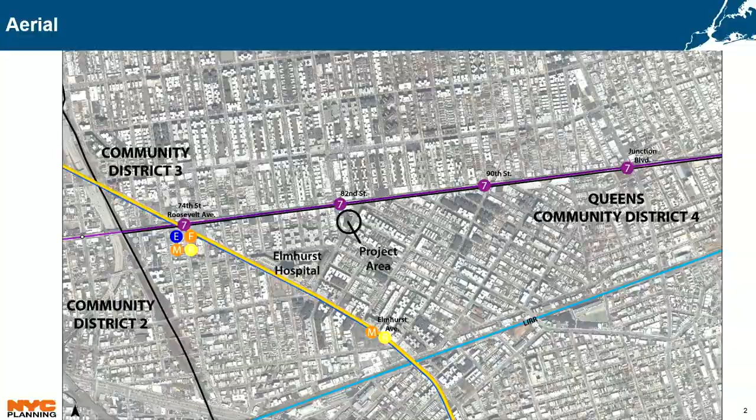The project area consists of a portion of a block of block 1493, lot 15. It is an irregularly shaped corner lot located in an R6 zoning district with a C1-3 commercial overlay, which is mapped at the time of the zoning resolution in 1961. The dotted outline here indicates the proposed rezoning district boundaries covering a portion of lot 15.

The applicant proposes to rezone the project area to a C4-5X district, which is an R7X equivalent.

The Elmhurst portion of the surrounding area borders the Jackson Heights neighborhood, loosely separated by Roosevelt Avenue to the north of the project area. And the area has a vibrant mix of commercial and residential uses, with commercial overlay districts lining major commercial corridors, concentrating local retail and offices along Roosevelt Avenue and 82nd Street.

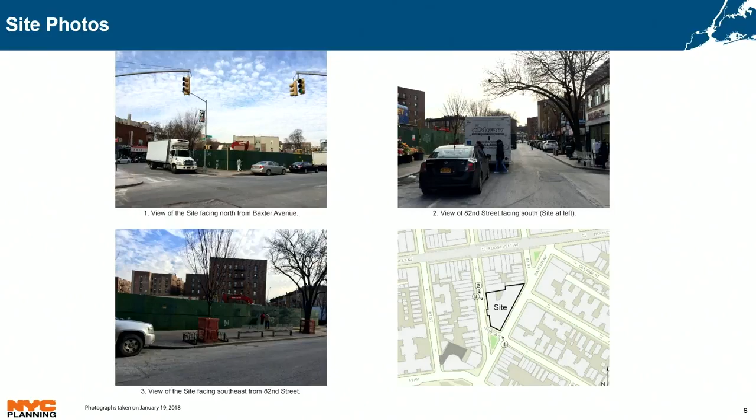So these site photos show all 3 street frontages where primary pedestrian entrances would be located or accessed from along 82nd Street and Baxter Avenue. In this first photo, we're looking at the frontage on Ithaca Street and Baxter Avenue, and the preceding photos show the corridor along 82nd Street. We're also showing views from Baxter Avenue, which would also have pedestrian access as well as a parking entrance.

So the applicant proposes 2 actions. First is a rezoning of the portion of the block on 1493, lot 15, from an existing R6 district with a C1-3 commercial overlay to a C4-5X district, again which is an R7X residential equivalent. The C4-5X district line would be mapped 180 feet south of and parallel to Roosevelt Avenue.

There is also an R7X district located just 6 blocks west of the project area, which was established in 2007, located also right by the Roosevelt Avenue subway station and transit hub, and it is an equivalent district that anchors higher density in a transit-oriented nature on a block entrance of a subway line.

In conjunction with this rezoning, the applicant proposed to establish within this proposed C4-5X district a mandatory inclusionary housing district with options 1 and 2. The MIH district would be coterminous with the rezoning boundary.

With option 1, 25% of residential floor area would be made affordable for residents with incomes averaging 60% AMI, with a minimum of 10% of housing to be affordable at 40% AMI, as well as option 2, where 30% of the residential floor area would be made affordable for residents with incomes averaging 80% AMI. The AMI for CD4 is roughly $47,404.

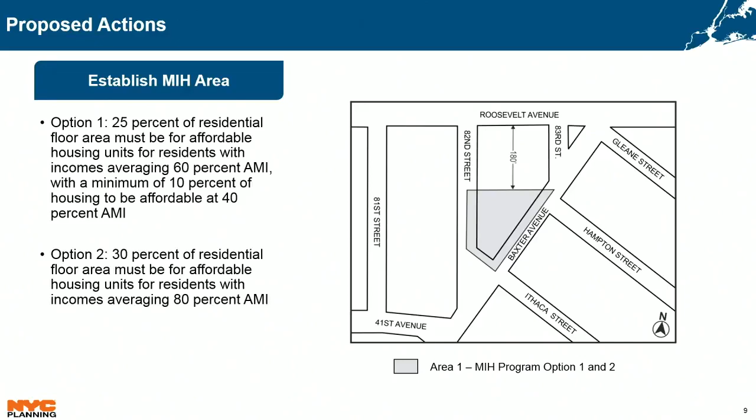So moving on, the proposed rezoning and establishment of the MIH area would facilitate the development of a new 13-story building covering the entirety of lot 15, with primary frontages along 82nd Street and Baxter Avenue.

The new building would consist of approximately 120 units, including 30 to 36 affordable units under the proposed MIH options. Roughly 2,000 square feet would also be dedicated to community facility use, as well as roughly 40,000 square feet of commercial uses. And there would be approximately 128 parking spaces located in the subcellar.

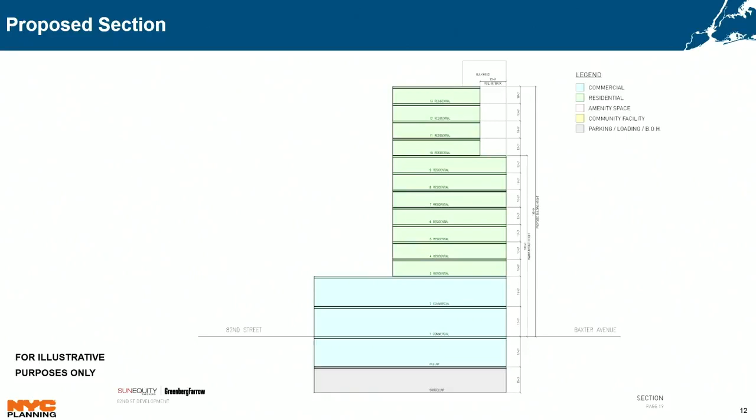Looking north, the first 2 floors of community facility and commercial are proposed to rise 2 stories and then provide a setback along Ithaca Street and 82nd Street before rising to a maximum base height of 105 feet at the 9th floor. The building is set back 15 feet at the 9th floor along Baxter Avenue before rising to a maximum building height of 145 feet at the 13th floor.

Questions from the commission? Commissioner de la Uz.

How are you? Good, how are you?

Good. So can you maybe describe a little bit what kind of outreach the developer did with the community to get to this proposal? Sure. Considering it's a pretty significant change.

Yes, the applicant has been meeting with the Community Board 4, as well as the BID and the local incoming council member, Moya, regularly. And the MIH options have been developed through guidance from the local council member.

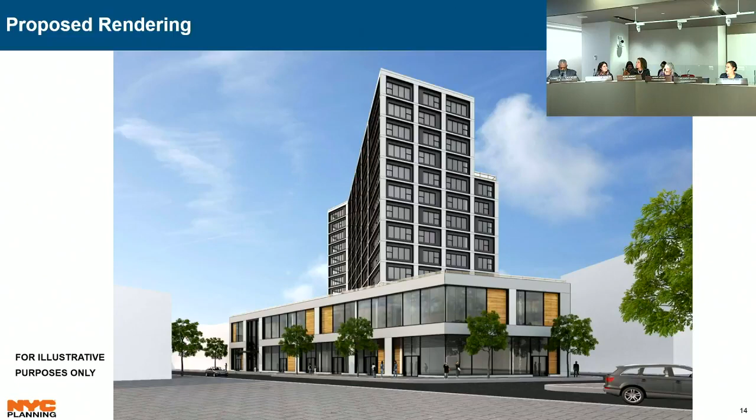One thing to note on the site plan, I don't know if we can go back to that. Yeah, actually, no, well, further, yeah, okay.

I am aware of conversations that have occurred that looked at the potential closing of Ithaca Street between 82nd and Baxter, which is really an underutilized connection. I know in other neighborhoods they have found ways to reclaim some space like that, and this is certainly a neighborhood that is in great need of space, and the kinds of tenants at this location will draw quite a number of people. So that could be an opportunity to consider as we look at this as well.

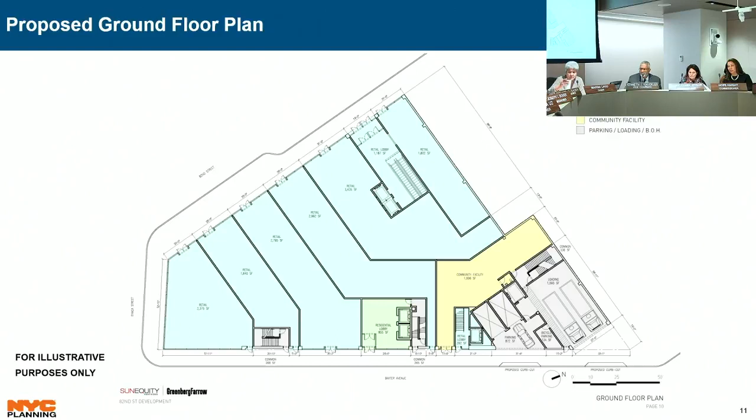Other questions? Yes, Commissioner de la Uz. That kind of triggered something for me, especially given where the loading dock is in relation to where the retail spaces are. What's the internal connection? Because right now it doesn't seem like it would be very helpful to those retail spaces.

I can get you some information on how circulation would happen in the subcellar in order to see where loading docks are located.

Other questions? Okay, the application is certified. Thank you.

The second item on the agenda, page 18, is a certification for special permits in Manhattan Community District 6. Nabila Malik of the Manhattan office is here to present.

Good afternoon, Commissioners. This is a private application by the Kips Bay Towers Condominium, Inc. for special permits pursuant to Section 13-45 for 2 separate at-grade parking lots servicing the North Tower and the South Tower of the Kips Bay Towers Condominium in Manhattan Community District 6.

Specifically, the applicant seeks 2 special permits: one to add 10 and legalize 8 existing parking spaces at the North Tower lot, and to add 4 and legalize 15 existing spaces at the South Tower lot. So 23 of the 37 total spaces to be added have existed and been in use by the building's residents for nearly 15 years as a result of the lots being restriped by the site's prior management to accommodate additional spaces, but without obtaining proper agency approval.

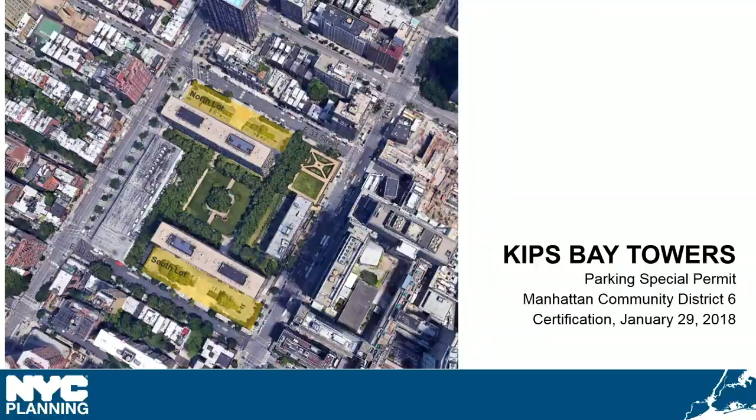The condominium site is shown in red. It's bounded by 1st and 2nd Avenues and East 30th and 33rd Streets, located in Kips Bay in an R8 zoning district with a C2-5 commercial overlay portion to the north of the site.

For some additional context, there is a rezoning application across the site on the north side of East 33rd Street that was certified 2 weeks ago.

The site, designed by I.M. Pei in 1961, is approximately 330,000 square feet and contains two 21-story residential towers, a north tower and a south tower, with a total of about 1,100 residential units.

The site is serviced by 3 parking facilities: one at-grade parking lot at the north tower with a legal capacity of 50 assigned parking spaces, one at-grade lot at the south tower with a legal capacity of 50 spaces, and a central below-grade parking garage with 300 spaces total for transient and residential accessory parking. The garage is operated by a third-party operator unrelated to the condominium.

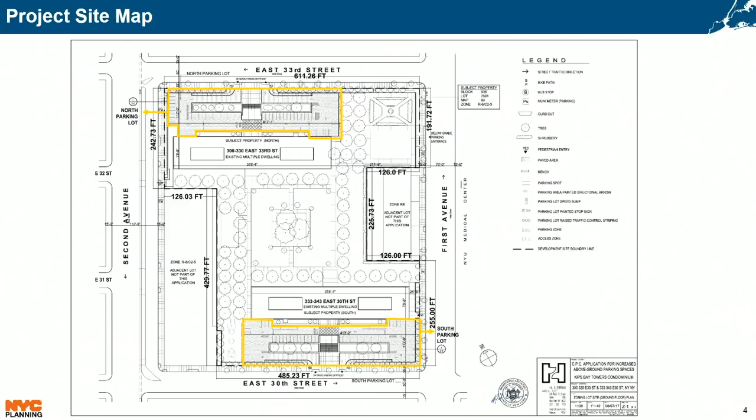The north lot, about 27,000 square feet, is located between the north tower and East 33rd Street. East 33rd is 80 feet wide westbound and has 3 travel lanes and 2 lanes for on-street parking. The lot is serviced by 2 one-way curb cuts, with the entering curb cut located to the east.

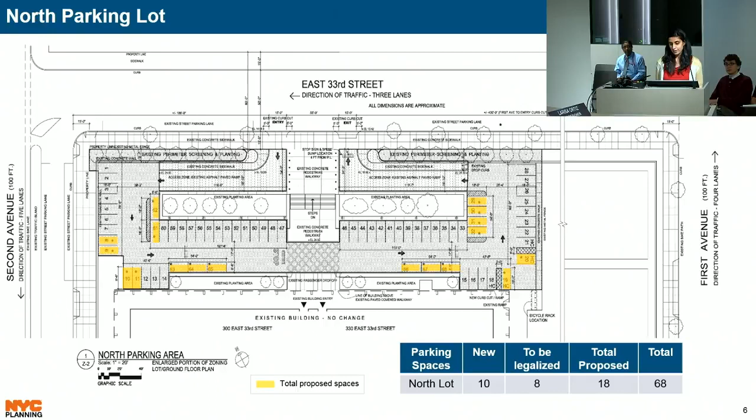The applicant proposes to increase the number of spaces by 18 from the permitted 50, for a total of 68 spaces, with 8 of the 18 spaces to be legalized in this application. 4 spaces would be designated as ADA accessible and would be located adjacent to curb cuts leading to the North Tower's front entrance.

The south lot, also about 27,000 square feet, is located between the south tower and East 30th Street. East 30th is 80 feet wide eastbound and has 3 travel lanes, a bike lane, and 2 lanes for on-street parking. The lot is serviced by 2 one-way curb cuts, with the entering curb cut located to the west.

The applicant proposes to increase the number of parking spaces by 19 from the permitted 50, for a total of 69 spaces, with 15 of the 19 spaces to be legalized in this application. Like the north lot, 4 spaces would be designated as ADA accessible.

The parking spaces are not rented to or used by the public. There will be no change to the existing curb cuts, and the current configuration of the lots can accommodate additional spaces without increasing the size of the asphalt surface. The project will also include additional striping for pedestrian crosswalks, bike racks, and 2 speed bumps in each lot.

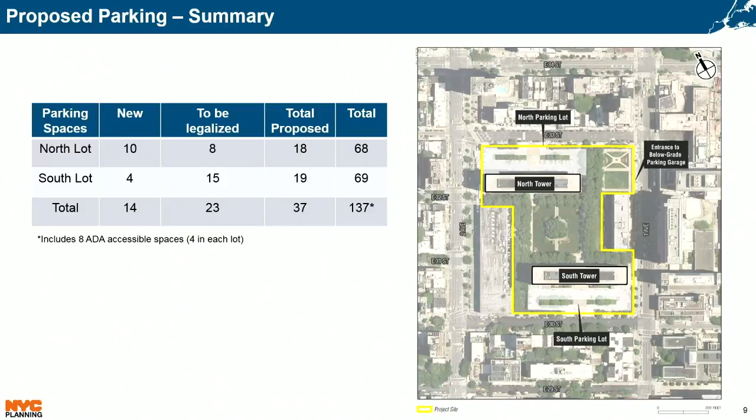In order to address the findings of Section 13455 for existing parking facilities, the applicant undertook a parking study and examined the change in residential units and parking spaces during the study period, which was a period of 10 years, in order to determine whether or not the proposed addition of 37 spaces is reasonable and not excessive in relation to recent trends in the area.

20% is the maximum permitted as-of-right ratio for Community District 6. So the applicant is seeking special permits pursuant to Section 13-45 for the north and south parking lots at Kips Bay Towers.

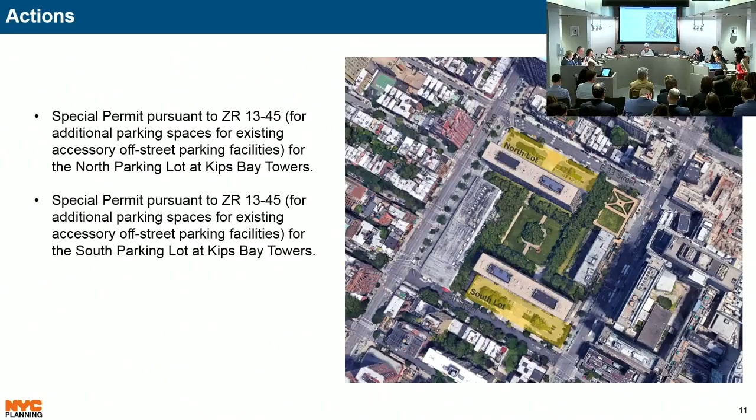The third item on the agenda, page 94, is a certification for zoning map and zoning text amendments and a special permit in Manhattan Community District 3. Xinyu Liang of the Manhattan office is here to present.

Good afternoon, Commissioners. This is an application by 14th at Irving LLC and New York City Economic Development Corporation, EDC, for approval of a zoning map amendment, zoning text amendment, and a special permit to facilitate the redevelopment of a 21-story mixed-use commercial development on a city-owned site located south of East 14th Street between 3rd and 4th Avenue in the Union Square neighborhood of Manhattan Community District 3.

According to EDC, the proposed actions are necessary to accomplish the project's goals, which include creating a 21st century technology hub that provides job training, startup office space, traditional office spaces, as well as an engaging ground floor retail use that will enhance the pedestrian experience of the neighborhood. The proposed project is anticipated to be completed by the end of 2020.

To provide some background, the unrestricted disposition of the entire project area was approved by the City Planning Commission in 1983 with no end user specified. The project area is comprised of 2 tax lots.

Lot 55 on the East 13th Street frontage was sold to Help USA, a nonprofit organization, to construct supportive housing called Genesis Building. In 1993, the PC Richards building was constructed on Lot 16 along East 14th Street frontage.

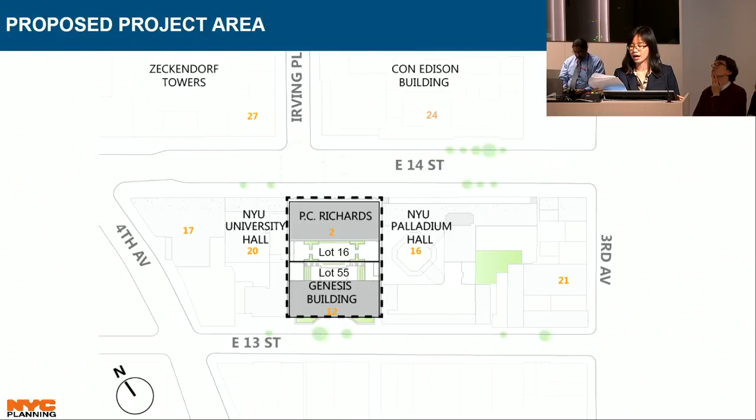Lot 55 along East 13th Street is improved with the Genesis building, built in 1994. It is a 12-story brick building providing 94 units of supportive housing and services.

The development site, Lot 16, along East 14th Street is improved with the two-story PC Richards building built in 1993. The distance between the two existing buildings is about 64 feet 6 inches, which is currently used as the rear yard for the Genesis building.

One thing to mention is that the applicants propose to redevelop only the PC Richard building site. There will be no change to the housing and supportive services in the Genesis building.

The proposed development will be approximately 209,000 zoning square feet of commercial development and will have a FAR of 6.8 over the entire zoning lot. The existing Genesis building has a FAR of about 3.2. In total, the FAR for the proposed development and the existing Genesis building will be 10 over the entire zoning lot.

The development site will be subject to a disposition agreement for a 99-year ground lease. The lease will restrict the property to some specific programs in each type of space.

The retail use on the base will include a food hall with restrictions on booths to encourage smaller and entrepreneurial retailers and bring the community and residents into the building.

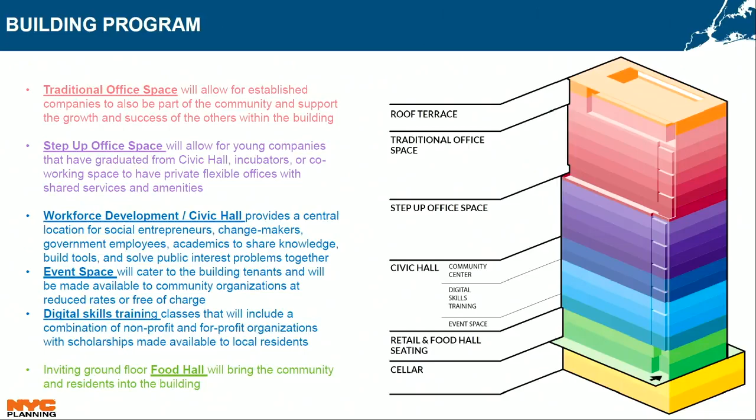According to EDC, the proposed zoning map amendment to extend the C6-4 district to cover the entire project area is consistent with the surrounding zoning districts, uses, and built form. Additionally, the area is well served by mass transit, and East 14th Street is a 100-foot-wide street that provides vehicle and pedestrian access across Manhattan.

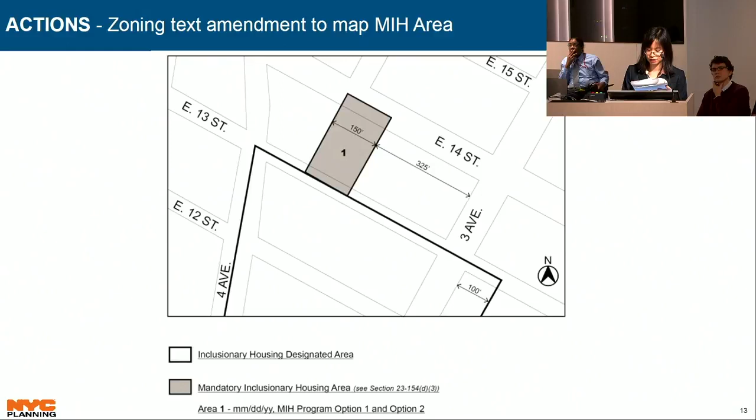Secondly, the application seeks to amend Appendix F of the zoning resolution to establish an MIH area over the project area. Please note that the proposed development does not contemplate residential uses. However, because there is a substantial increase in permitted residential capacity due to the proposed rezoning, the MIH program applies here.

Thirdly, the application is requesting a zoning text amendment that modifies zoning resolution 74-721 so that the project area is eligible for the bulk waivers. Specifically, the zoning resolution will be updated so that zoning lots less than 40,000 square feet but over 30,000 square feet and fronting a wide street in a C6-4 district in Manhattan Community District 3 can benefit from the bulk waivers.

Lastly, the application is seeking the 74-721 special permit to allow two bulk waivers to modify both the height and setback requirements and the required rear yard equivalents.

The proposed development has a straight wall that rises to the 13th floor before it sets back 10 feet, then rises again to the 19th floor, setting back 6 feet, then rising to its maximum height of 286 feet.

The second waiver being requested is relief from the 60-foot rear yard equivalent requirement. The application is requesting a waiver of 8 feet to allow a 52-foot deep open area.

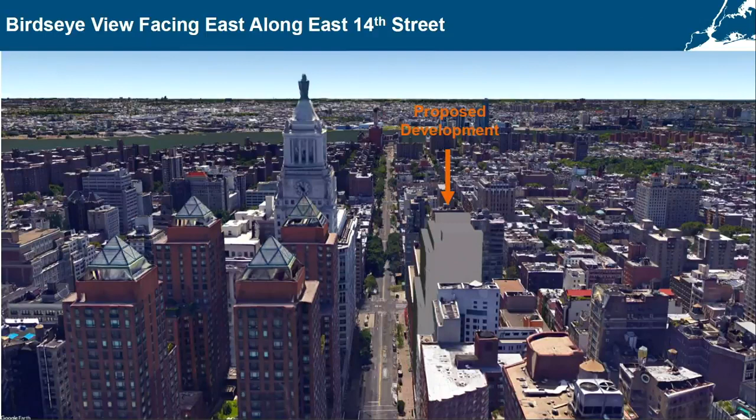Questions from the commission? Commissioner Deloze. Hi. A couple questions.

One is, given that this is a 99-year lease and that there's obviously public benefit intended for this project, what's the ongoing mechanism for the community to give input into this project over the course of the lease? Has that been determined, do we know?

I will have to get back to you on these questions.

Okay. And then it would just be helpful to have, when it comes back, more information about the nature of the programming. I love the color codes, that's great. But the nature of the programming and the resources to support it. Is it the market rate components of the project that are subsidizing the more public benefit pieces like that? That would be helpful to understand, especially, and who the intended beneficiaries of that are. Especially given the fact that it's between two NYU facilities. There may be a mismatch between who the beneficiaries are intended to be versus who's immediately located next to the property. Okay.

Thanks. Other questions? Commissioner Levin.

I had those questions as well, and I'm curious to know, in addition, once we get an understanding of what the immediate vision for the building is, also how the lease agreement or other documents surrounding this will enforce that into the future, because we all know that real estate takes twists and turns and unexpected things happen. And so we want to be sure that the public purposes that are reflected in this project get realized in an appropriate way.

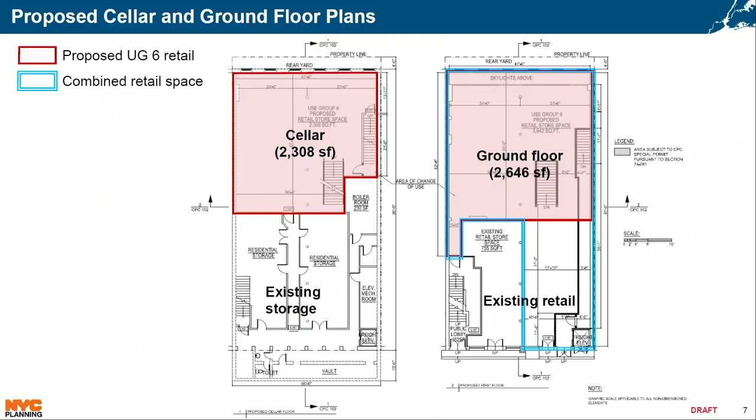To facilitate the proposed retail use, the applicant requests a special permit under Section 74-781 of the zoning resolution, where certain findings regarding good faith marketing efforts need to be made. Since June 2013, the applicant advertised the availability of the cellar and ground floor space of the building for as-of-right uses, most recently at a rate of $70 per square foot for a period of over a year. The applicant's marketing efforts include advertisements in citywide and local newspapers, marketing through brokers, and outreach to industry groups. According to the applicant, despite these efforts, there had been no demand for long-term use of the vacant space for as-of-right uses as of the date of the filing of this application. The applicant's statement of findings and sample marketing materials are included in your briefing packages.

That's it for the presentation. Happy to answer any questions. Questions? Commissioner Levin.

Sylvia, do we know what happened to the tenant in the ground floor residential space and whether they were in occupancy when the applicant purchased the unit? The applicant stated that by the time they acquired the unit in 2013, it had already been vacated. But we can ask the applicant to look into the historic tenancy.

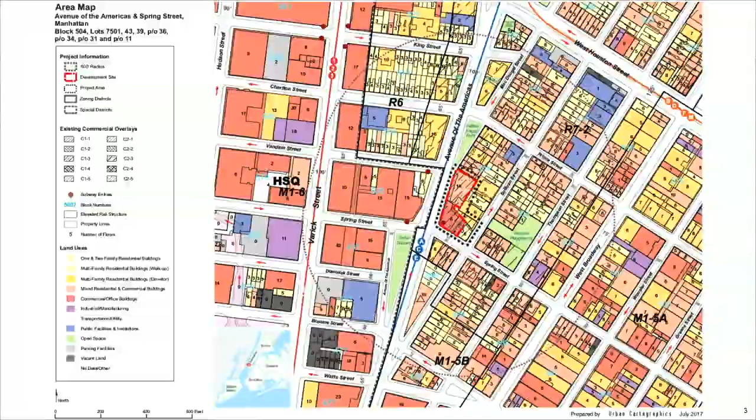As shown on the zoning comparison table, the regulations of the 2 commercial overlays are largely identical, except that the C2-5 overlay permits a wider range of commercial uses.

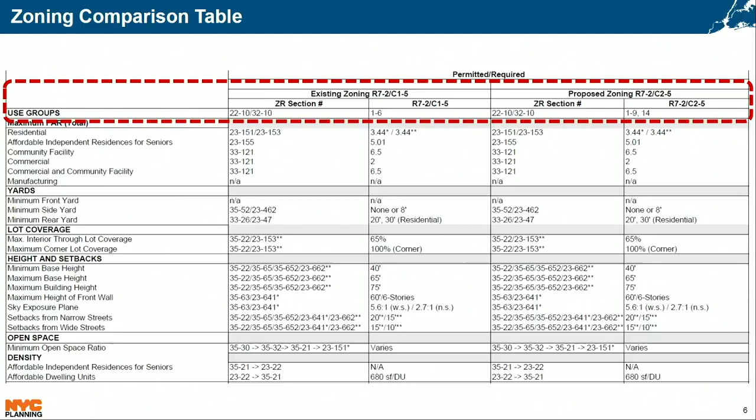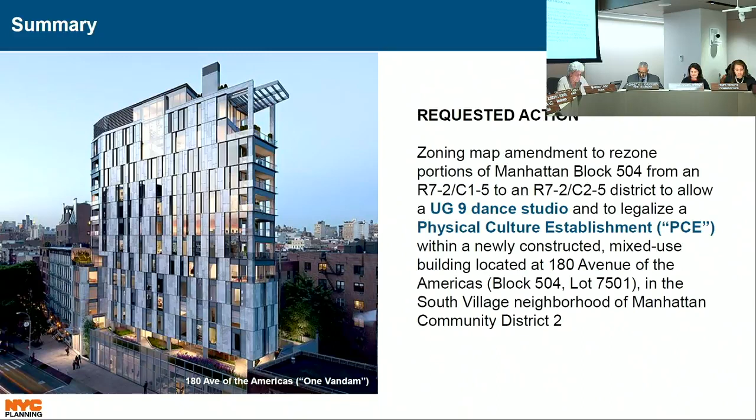Okay, the application is certified. Thank you.

The 6th item on the agenda, page 190, is a referral of a zoning text amendment in Manhattan Community District 4. Annie White of the Manhattan office is here to present.

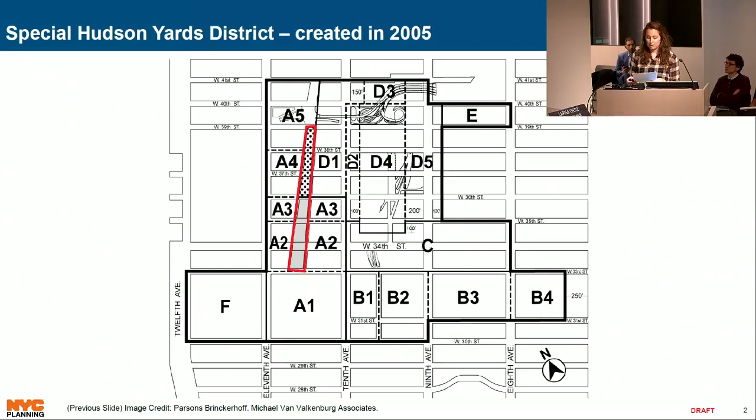For some background, the Special Hudson Yards District was adopted in 2005 with the intention of creating a mixed-use, medium to high-density business district with an extensive open space network. The primary open space is the Hudson Boulevard and Park, which I've outlined in the zoning map here in red. It's a linear north-south park that will be bordered by a tree-lined boulevard that, upon completion, runs from West 33rd Street to West 39th Street, mid-block between 10th and 11th Avenues.

Phase 1 of the park, which runs from 33rd Street to 36th Street and includes what we refer to as blocks 1 through 3, was acquired by the city for redevelopment and opened to the public in 2015. Phase 2, which I've indicated here in the red outline, runs from West 36th to West 39th and includes blocks 4 through 6. It is not yet under construction, and lots in phase 2 are in private ownership and are subject to the special regulations that are the subject of this text amendment. Those regulations were included to facilitate these blocks' improvement as the boulevard and park, and also to allow owners to recognize the value of their lots that are now mapped as the park.

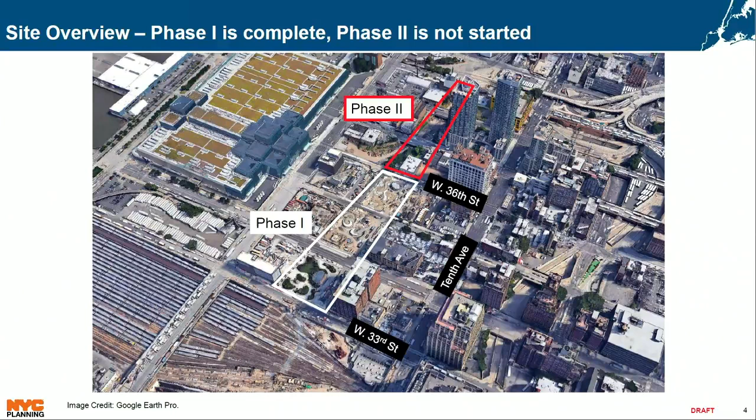Currently, Section 93-32 outlines floor area mechanisms for phase 2 of the park. First, there could be no new development or expansions in the mapped Boulevard and Park. There are operating businesses currently mapped as the park, and those can continue operating, but they're kind of frozen by the zoning.

Owners of property are able to transfer the development rights from the mapped park parcels to specific receiving sites throughout the Special Hudson Yards District, and we've seen multiple people come in for that chair certification for the transfer of development rights. Third, owners may seek a contribution in kind authorization, allowing property owners to build out portions or entire blocks of the boulevard and park in exchange for District Improvement Fund bonus development rights.

In July of 2017, the City Planning Commission approved the first of these contribution in kind authorizations for Tishman Speyer's property on Block 4. The department is pleased that this contribution in kind authorization mechanism is being used, as we want to see the expedited development of phase 2 of the Hudson Boulevard and Park.

However, City Planning has been approached by multiple parties, including City Hall, Hudson Yards Development Corporation, and private developers, who have brought to our attention that there are certain limitations in the text that discourage private applicants from seeking this contribution in kind. So I will run through the issues with the text as we've identified them, and then how we're proposing in the new text to address those, one by one.

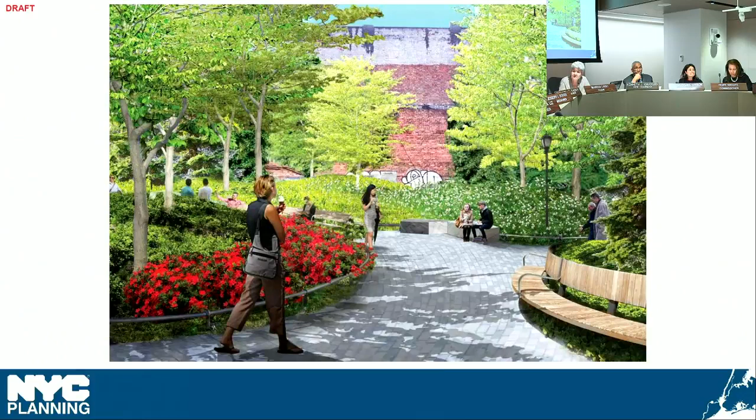Questions? Yes, Commissioner. Thanks for walking us through. I'm just wondering, I can't remember when this came before us earlier for the other property, whether the reasonable cost was determined using an independent party. Yes, there were two independent parties doing the analysis of the cost, and those were compared, and then that was provided as part of the authorization.

Okay. Would it make sense to make that clear? Perhaps, I'm not sure if that's something we discussed, but I'll go back to the group and bring that up. Thanks.

Other questions? Commissioner Levin. Well, just for information, you mentioned you've been approached by a number of folks interested in seeing this happen. Are you seeing interest in all three of the undeveloped blocks? Are people talking about parks on all of block 4, 5, and 6? Might it really happen? Yes, we're hoping. So there's certainly ongoing active conversations on Block 4 that we're hoping, if this text is approved, we'll see them quickly coming in for the authorization.

And then there has been conversations on Block 6, but those have kind of been put on pause. But we're hoping, HYDC's made it clear that after this text, if it's approved, they would want to reopen those conversations. Block 5, the eastern portion is already built out, and the lots on the western portion of the Boulevard and Park are still under kind of disparate private ownership. So those conversations aren't actively happening now, but perhaps down the road if there's some zoning lot consolidation there.

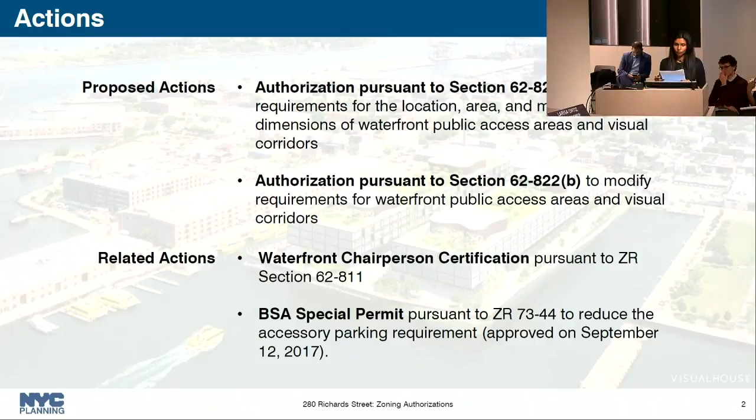Good afternoon, Commissioners. This is an application requesting zoning authorizations to modify waterfront public access area requirements. If approved, these actions would facilitate the development of an approximately 638,000 square foot commercial building and a 1.83 acre waterfront public access area. Related actions include a waterfront chairperson certification and a special permit from the Board of Standards and Appeals to reduce the accessory parking requirement.

The project site is located along the waterfront in the Red Hook neighborhood of Community District 6 in Brooklyn. The project area is located in an M3-1 zoning district, which allows for a maximum FAR of 2.0 and permits industrial and commercial uses in addition to limited retail uses. The surrounding area is characterized by a mix of commercial and industrial buildings, 2 to 3 story mixed use and residential buildings, vacant lots used for vehicular storage, and community facilities.

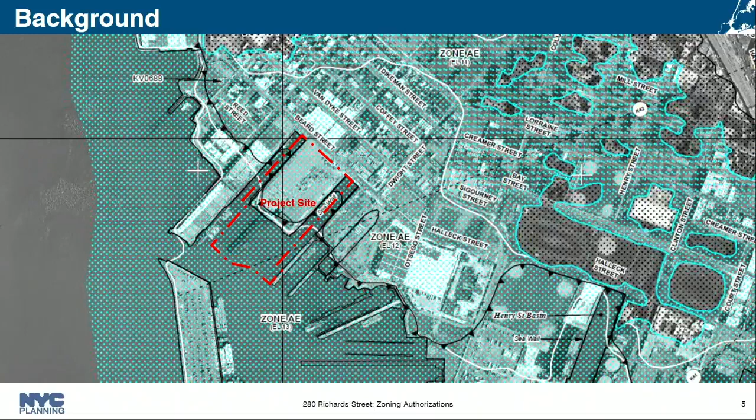The Southwest Brooklyn IBZ runs along most of the waterfront in Red Hook, but does not include the project area. The project site is located within the 100-year flood zone with a base flood elevation of 13 feet. The project site is the location of the former Revere Sugar Factory, which ceased operations in 1985 and was demolished in 2007. The site is currently vacant.

The landward portion is a rectangular-shaped peninsular lot, bounded by Beard Street to the northeast and the Erie Basin to the east, south, and west. To the west of the project site are the Beard Street warehouses, which contain commercial and industrial uses. Further west is an MX district, which was the result of the 2002 Red Hook stores rezoning, which facilitated the establishment of a Fairway grocery store with residential units above in a 5-story warehouse building.

The Erie Basin breakwater to the south contains warehouse and storage facilities and a barge port that generates commercial marine traffic. To the southeast is an IKEA home furnishing store, which was the subject of several actions approved by the CPC in 2002 that permitted a large-scale retail establishment in an M1-1 district and waived certain waterfront area bulk and design regulations. The IKEA site includes a waterfront esplanade that extends along the site's entire waterfront that would connect to the proposed development's waterfront public access area.

Nearby access to public transportation includes bus service with the B61 and B57 bus routes, making stops a block away from the project area, and ferry access to Manhattan at the IKEA dock and the Red Hook dock at Bergen Street. The nearest subway station is the Smith and 9th Street station on the F and G lines, slightly over 1 mile from the project area.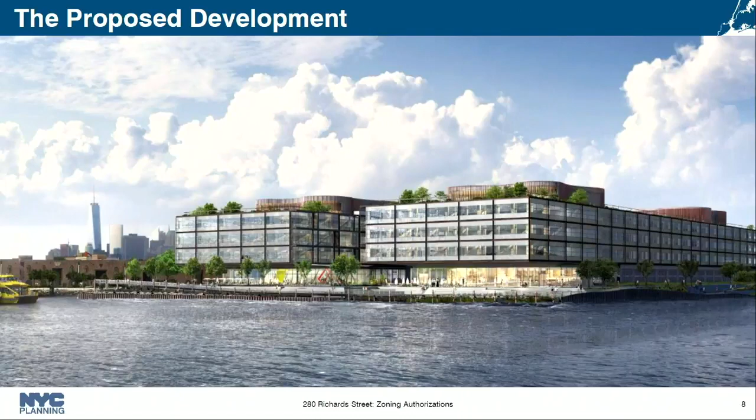The proposed building would be a 5-story building with approximately 614,000 square feet of office use and 24,000 square feet of retail use. The first story would include retail uses and office lobby space, while the 2nd through 5th stories would be occupied with office uses. The 2 parallel structures would be connected below grade by an accessory parking facility, which was the subject of a special permit from the BSA to reduce the accessory parking requirement for the proposed use group 6B office use.

Given the peninsular-like shape of the lot, which results in a long shoreline, approximately 1,900 feet, the applicant has designed 4 distinct areas of publicly accessible space: the eco-recreational edge, the basin panorama, the urban maritime edge, and the visual corridor. The following diagrams and renderings show the proposed design and edge conditions along these areas.

The eco-recreational edge is located along the southeastern border of the project area. This length has been designed to facilitate interaction with the water's edge in different ways. The primary circulation path is located closer to the building, with a secondary path that splits from the primary path and leads down to the water's edge. Between these 2 paths are landscaped areas and a variety of seating options, including timber seating and stone seat walls.

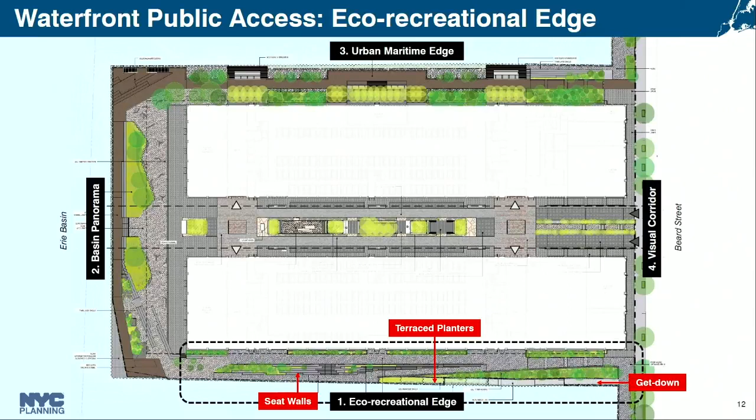The basin panorama is located along the southwest edge of the project area. From the end of the eco-recreational edge, the main pedestrian pathway would be a timber boardwalk, which continues along the edge of the waterfront, turning towards the northwest. Granite seat walls are located behind a sunken planter with ground cover, shrubs, and trees. The main pedestrian pathway connects to a stone staircase at the center of the basin panorama, which allows for circulation between the basin panorama and the visual corridor.

At the southeast corner of the site, the bulkhead would be cut back to allow water to flow beneath the main pedestrian path, which is an elevated boardwalk at this location.

Further west of the central stairs is a sloping lawn that would provide expansive views of the Erie Basin. Granite seat walls are located at the base of the lawn along the primary circulation path. At the southwest corner is a timber amphitheater that slopes up towards the waterfront, with seating facing in towards the basin panorama.

Continuing along the waterfront, the urban maritime edge is located along the northwestern edge of the project area. The design is inspired by the working waterfront across the inlet, which contains docks for the New York Water Taxi and other marine vessels along the Civil War-era Beard Street warehouses. This edge offers a series of views across the inlet.

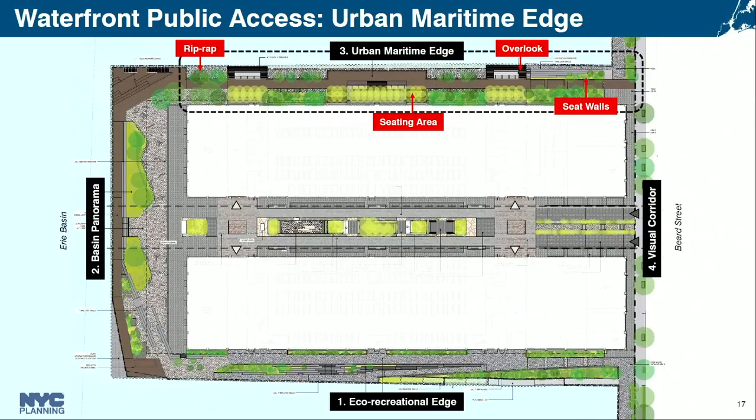The primary path shifts at several locations towards and away from the inlet to create a variety of experiences. The bulkhead has been cut back in 3 locations to create riprap conditions that allow water to flow into the site and beneath the boardwalk. These features also increase the size of the intertidal zone, which facilitates additional aquatic habitat with the sloped riprap adjacent to the boardwalk edge.

At 2 locations along the pedestrian path, overlook points that include timber benches extend out towards the waterfront, providing seating and views across the inlet. Closer to the building are 3 areas with movable seating and chairs for public use interspersed with trees.

Areas designated as PAA include the visual corridor itself, as well as space underneath the building cantilevers and overhangs adjacent to the shore public walkway, or along the visual corridor that provides access to retail, lobby, gallery, and amenity spaces.

The visual corridor extends from the terminus of Richards Street to the basin panorama edge of the shore public walkway. The applicant anticipates this area to be an active central open space between the 2 building portions for both public and tenant use.

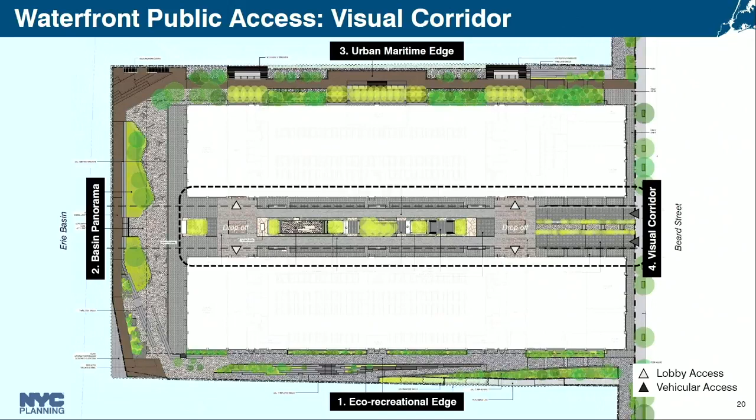The Beard Street entrance would include 2 pedestrian paths and cobblestone ramps for short-term vehicular access, and a central staircase lined with ornamental trees leading up to the first set of building lobby entrances.

The shared pedestrian and vehicular drive aisles, known as woonerfs, extend between the drop-off and turnaround points adjacent to the 2 sets of building lobby entrances. The central area between these 2 shared aisles contains a variety of spaces with benches, movable seating and tables, planters, sculptural elements, a retail kiosk, and a dog run.

This is an image of the visual corridor as seen from Beard Street.

The applicant is seeking zoning authorizations to facilitate the site-specific programming of publicly accessible areas to ensure a distinctive experience along the different shoreline edges, as well as to overcome site planning constraints, which include a higher base plane to accommodate flood-resilient construction, the provision of below-grade required accessory parking, and the peninsular-like shape of the lot that requires an unusually long shore public walkway.

The applicant proposes to provide waterfront public access areas in excess of the square footage requirements for such areas. However, certain portions of the waterfront public access area will be less than the required dimensions. The applicant is seeking to reduce the depth of waterfront yards and shore public walkway to less than the required 40 feet in select locations.

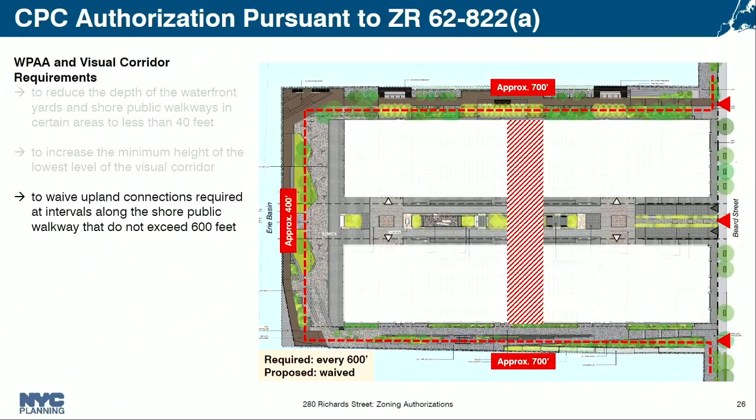The applicant is requesting to waive out of providing upland connections, which are required at maximum intervals of 600 feet along the shore public walkway. Due to the project area's high length-to-width ratio and peninsular-like shape, the complying upland connections shown here in the red hatched area would link to the visual corridor and the shore public walkway, but would not connect directly to the street or provide quicker access to the street than the direct line of travel along the shore public walkway itself. Furthermore, complying upland connections would bisect each of the two building portions, reducing building footprints and impacting floor plate efficiencies.

The applicant is seeking a reduction of the planting requirement from 50% to approximately 24.6% to support the design goal of bringing pedestrians closer to the water. As a result of the secondary pathway along the eco-recreational edge that slopes to a lower elevation, and the retaining wall structure needed to negotiate this grade change, much of the area is unable to be fully planted. Furthermore, while the riprap conditions would be planted with shrubs and trees, these areas do not count towards the planting requirement for the purposes of zoning.

The applicant is proposing to modify the requirement that within 5 feet of the edge of any planted area, the grade level should be no more than 18 inches higher or lower than the adjoining path, to permit up to 5 feet 3 inches above the adjoining path in order to negotiate the grade changes between the 14-foot design flood elevation and lower pathway areas.

The applicant is also seeking relief from the requirement that any retaining walls do not exceed 60% of the planter perimeter and not exceed 18 inches in height. The applicant is proposing terrace planters that consist entirely of retaining walls with varying heights up to 5 feet 3 inches.

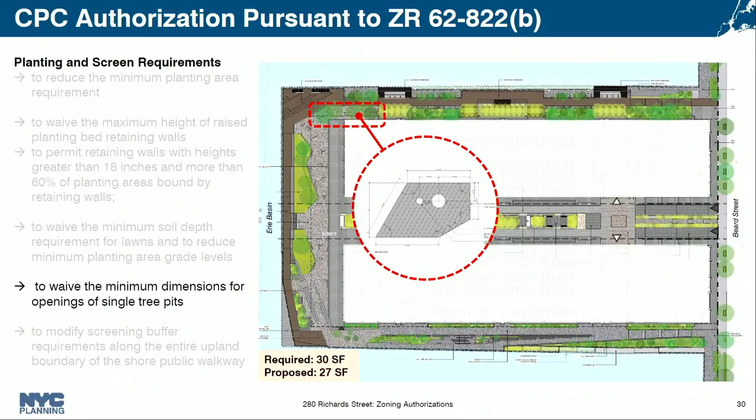The applicant is seeking to reduce the minimum dimensions for openings of single tree pits from 30 square feet to, at minimum, 27 square feet, to allow for larger cobblestone surfaces in the surrounding area for movable tables and seating.

The applicant is seeking relief to provide screening buffers only in specific areas between the shore public walkway and non-publicly accessible areas. This relief would allow for direct access points from the shore public walkway to the retail, amenity, and gallery spaces that are intended to activate the esplanade.

The applicant is also proposing to reduce the 10-foot minimum required width due to the narrow widths of portions of the shore public walkway and to maximize accessible space for public use. The minimum width proposed within the shore public walkway is reduced to 1 foot 4 inches, but would be an aggregate of 4 feet, including the adjacent screening in the private space, which does not count towards the requirement.

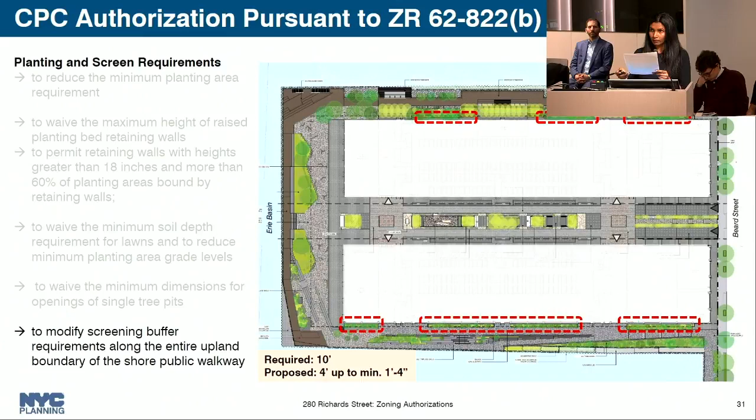The applicant is requesting to waive the provision that no shade trees be planted within 15 feet of the center line of a visual corridor. This would facilitate the planting of trees in the central area of the visual corridor, which is intended to be an active open space with shaded seating and amenities.

The applicant is requesting to waive requirements that fences have a maximum height of 36 inches and be at least 70% open. A fence is proposed surrounding the dog run feature that would have a height of 48 inches and be 62.5% open to provide greater visual and physical separation between this kind of feature and the rest of the visual corridor.

The applicant is proposing to place a total of 4 bollards in the circulation path near the entrance of the waterfront public access area in order to prevent unauthorized vehicles from driving into the shore public walkway. Additionally, the proposed bollards exceed the 30-inch maximum height requirement by 6 inches because this height more closely aligns with the height of the adjacent handrails along the ramps, maintaining a consistent material, height, and design language.

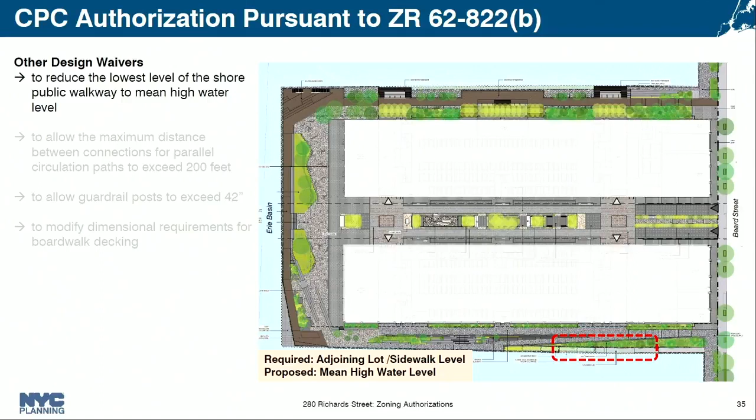The applicant is requesting to modify the requirement for the lowest level of the shore public walkway from the elevation of the adjoining lot or sidewalk to the mean high water level in order to permit the get-down feature along the eco-recreational edge, which allows for access to the Erie Basin.

The applicant is seeking to modify the requirement for the maximum interval between two circulation paths that are parallel to each other from 200 feet to approximately 212 feet. Along the eco-recreational edge, the secondary path slopes down to the water's edge and reconnects with the main path at a maximum interval of 212 feet 5 inches.

The applicant is proposing to provide guardrails along the water's edge to a maximum of 46 inches, which exceeds the permitted height of 42 inches. The main rail and panels comply with the height requirement, but the posts exceed the maximum permitted height by 4 inches to provide breaks in the paneling.

The applicant seeks relief for the requirement that wood planks for the boardwalk or decking be a minimum thickness of 3 inches. The proposed decking would be 1 inch thick, but would sit atop a boardwalk substructure that is 4 inches thick, resulting in aggregate decking of 5 inches for additional support and structural soundness.

The applicant believes that the requested waivers facilitate a superior design because of greater design flexibility to respond to the unique site conditions. In summary, the requested actions would facilitate the development of a 5-story, approximately 638,000 square foot commercial building and a 1.83 acre waterfront public access area. Thank you.

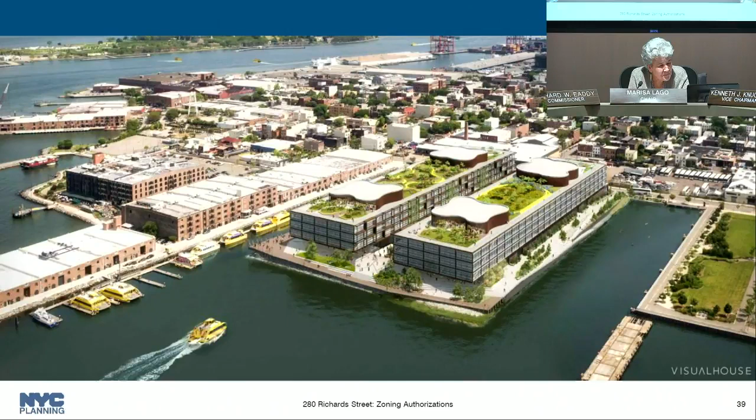And then I just have one point where I would like further explanation, perhaps you can even do it. The section on the bottom of the page where the waterfront goes down to 1 foot 4 inches for accessibility — how does that work exactly?

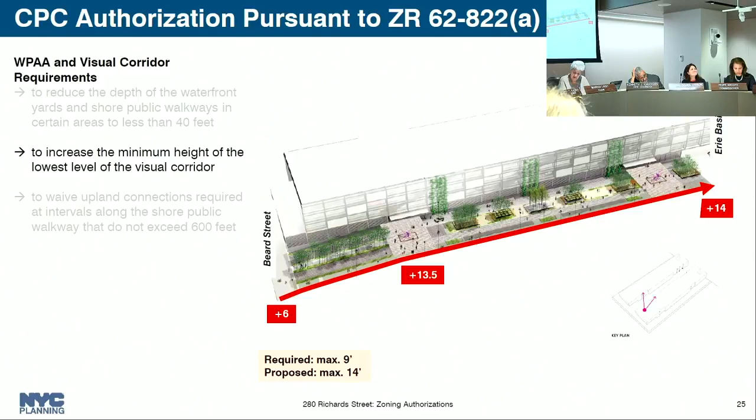Item number 8 on the agenda, page 266, is a non-ULURP post referral for a Fresh authorization in Brooklyn Community District 8. Kevin Kraft is here to present. Good afternoon, Commissioners. This is an application returning for post referral by Happy Living Development for an authorization to modify the maximum building height from 85 feet to 99 feet in a mixed-use commercial residential building containing a fresh food store at 805 Washington Avenue in Prospect Heights, Community District 8, Brooklyn.

The proposed action would facilitate the development of a 9-story, approximately 53,000 square foot mixed-use development, including a 6,300 square foot fresh food store on the ground floor and 47,000 square feet of residential space for 37 units. There is also a related chairperson certification to certify that the proposed food store use would be a fresh food store.

The proposed project area is bounded by Eastern Parkway to the south, Classon Avenue to the east, Lincoln Place to the north, and Washington Avenue to the west. The surrounding area is predominantly residential, comprised of multifamily walk-up and elevator buildings ranging between 3 to 15 stories. Taller buildings are generally located south of Lincoln Place along Eastern Parkway. The project area is well served by public transit. The 2, 3, and 4 subway lines stop at the Brooklyn Museum Station, one block south of the project site. Additionally, there are several bus routes, including the B45 and B48, which operate nearby.

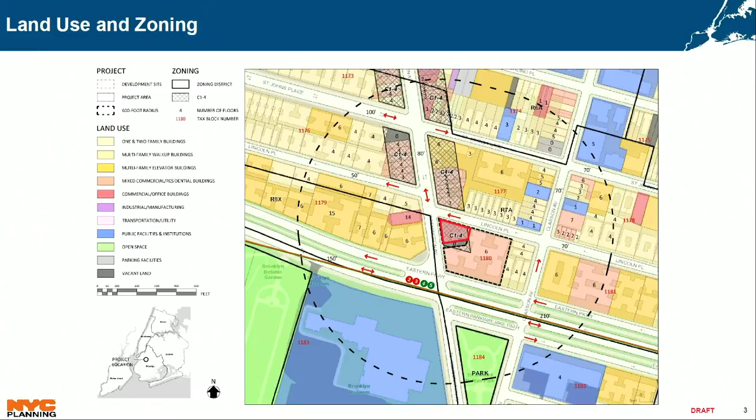The area is mapped within an R7A zoning district. When mapped with a qualifying ground floor, R7A permits a maximum base height of 75 feet with a maximum building height of 85 feet. A C1-4 commercial overlay is mapped along the project site and the majority of Washington Avenue to a depth of 100 feet. The area was mapped as part of the Food Retail Expansion to Support Health program, known as FRESH, in 2009.

The project area includes 2 tax lots, lots 1 and 6, comprising one approximately 48,000 square foot zoning lot. Lot 6, outlined in red, is the proposed Fresh project site. It's located on the corner of Washington Avenue, considered a wide street, and Lincoln Place, considered a narrow street. The site was previously improved with a single-story retail building, which included a 5,400 square foot supermarket. That building was vacated and demolished in 2017. Lot 1, fronting on Eastern Parkway, currently has a 6-story, 67-foot tall residential building, and the applicants are purchasing development rights from Lot 1 to transfer to the project site on Lot 6.

The applicants are requesting an authorization pursuant to Zoning Resolution Section 63-22 to exceed the R7A maximum permitted building height of 85 feet by 14 feet. For buildings containing a fresh food store, the commission may authorize a 15-foot height increase in the maximum allowable building height, provided the commission makes 3 findings: that the modification is necessary to accommodate a first-story fresh food store, that the proposed modifications would not adversely affect the essential scale and character of the adjacent buildings and any historic resources, and that the proposed modifications will not unduly obstruct access to light and air of adjacent properties.

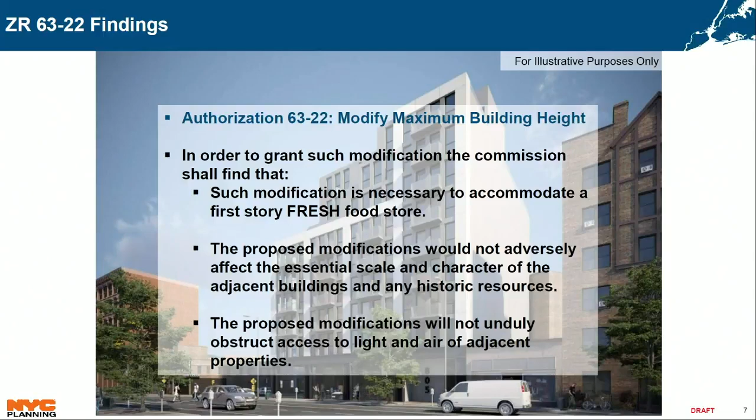The proposed fresh food store would be located on the ground floor with floor-to-ceiling heights of 14 feet, which would contribute to a superior retail space. The fresh food store, as part of the chairperson certification, would generate a floor area bonus of approximately 6,300 square feet, which would be accommodated on the 8th and 9th stories, adding 1.5 stories to the development.

In response to a question raised by the commission at referral regarding the location of store signage and the incorporation of HPD's retail guidelines, the applicants expressed that the building as currently designed meets several of HPD's guidelines, including ground floor ceiling heights, entry at grade, street trees, transparency, and separated entrances by use. They're also open to considering the guidelines further regarding future signage.

According to the applicants, this authorization is necessary to provide a fresh food store on the ground floor, addressing the need for a full-service supermarket in the neighborhood, and to accommodate the additional floor area generated from the fresh bonus, and to provide additional housing.

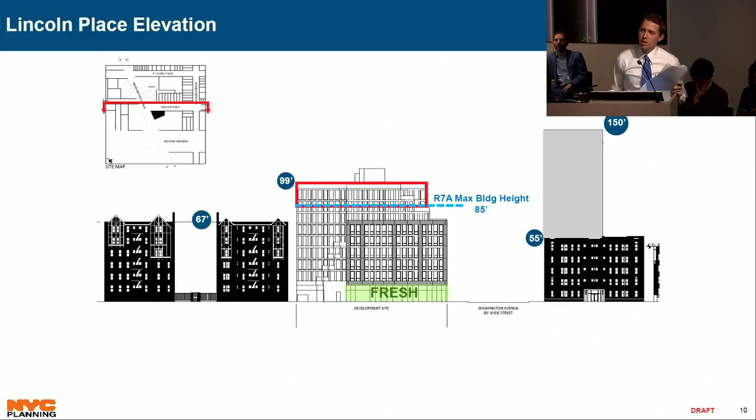The blue line represents the maximum building height for an R7A building with a qualifying ground floor. Outlined in red is where the additional height would be located.

This photo is showing from south from Lincoln Place. You can see across Washington Avenue, which again is a wide street, the proposed residential building reaching 150 feet, as well as another residential building that reaches a height of 55 feet. I also want to point out that the building sets back 27 feet and 15 feet on Lincoln Place, as well as 10 feet on Washington Avenue.

On December 27th, Community Board 8 submitted a letter to deny support for the application, specifying that the zoning and financial incentives were not necessary to attract a grocery store at this location, and that this portion of Community District 8 is not underserved by grocery stores. In the letter, the Community Board did specify they'd be willing to entertain support of the application if the new supermarket operated in a way that would serve a range of incomes.

Happy to take any questions. Thank you. Questions from the commission?

Commissioner Efron: I have two questions, one that came up because of your presentation. The 150-foot building, was that through a BSA approval or? That's as of right. That's actually an R8X district. That was R8X, not R7. Correct. And then my second question was really just how we approach this.

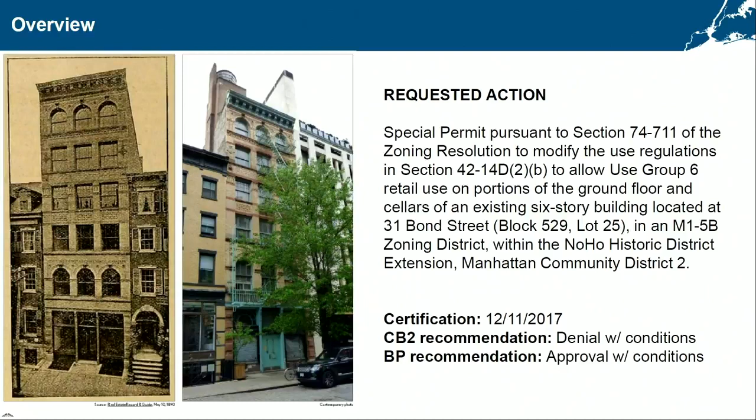The commission may recall that the application was certified in December 2017. In your briefing packages are recommendations from CB2 and the Manhattan Borough President. CB2 recommended denial with conditions, and the Borough President recommended approval with conditions. I'll do a quick overview of the project and discuss the recommendations. The building was built around 1888 and represents one of the earliest examples of store and loft typology in NoHo.

The building historically housed a variety of uses, but has been vacant since December 2013. The project site is located within an M1-5B district, which permits light industrial and commercial uses as-of-right up to 5 FAR. Use group 6 retail use is not permitted as-of-right below the level of the second story. The site is located on Bond Street, mid-block between Lafayette and Bowery.

Along Bond Street, residential conversions and new residential buildings have been permitted by CPC special permits or BSA variances over the years. This stretch of Bond Street also has some existing commercial retail uses, as well as eating and drinking establishments towards Bowery. The approximately 3,000 square foot zoning lot is about 25 feet wide by about 124 feet deep. The rear of the site abuts Jones Alley, an unmapped private street that connects Great Jones and Bleecker Street.

The applicant proposes to use 3,849 gross square feet of floor area on portions of the ground floor and the cellars for use group 6 commercial retail use, including 2,021 zoning square feet on the ground floor and additional retail uses in the cellar and sub-cellar level. While the building was granted a BSA variance for residential conversion in 2015, currently the applicant intends to abandon the BSA variance and reoccupy the upper floors with conforming offices.

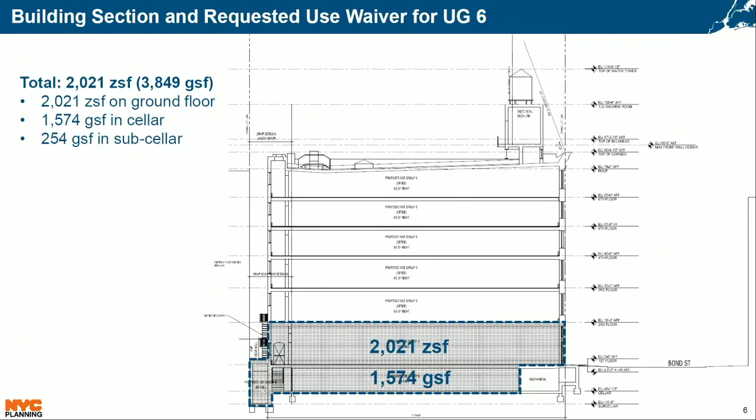In connection with the proposed use modification, the building will undergo a comprehensive renovation and historic preservation process. The application was certified on December 11, 2017. At its full board meeting on December 21st, 2017, Manhattan Community Board 2 adopted a resolution recommending denial of the application unless the following conditions are met.

First, the applicant formally communicates with the BSA to abandon the variance in its entirety. Second, the applicant confirms there was never a loft law case in this building and the JLWQA units were disposed of properly. Third, the CPC stipulates no eating and drinking establishments in the special permit. And fourth, the applicant makes every effort to find a maker retail tenant as described in the application.

On January 24th, 2018, the Manhattan Borough President issued a recommendation to approve the application, provided that the applicant keeps their commitment to abandon the variance and secures an artisanal retail use on the ground floor. That's it for the presentation. Happy to answer any questions.

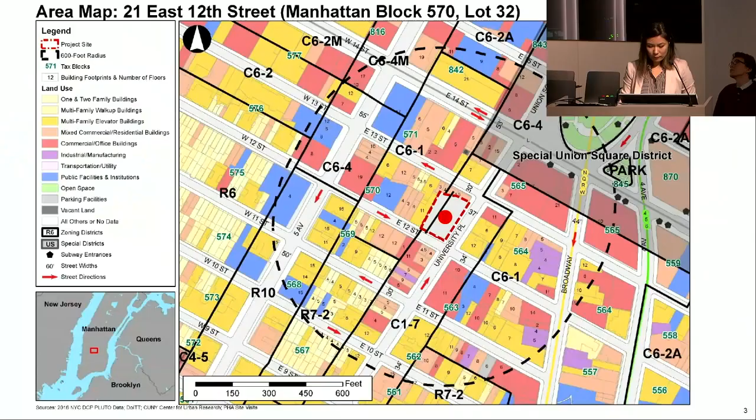The commission will recall that the project site is located at the corner of East 12th Street and University Place, in the neighborhood east of Greenwich Village and south of Union Square. The area is characterized by buildings of varied scale and uses, including residential, commercial, and institutional uses. University Place is lined with some mid to high-rise apartment buildings, ranging from 10 to 15 stories.

In recent years, the neighborhood has seen some residential growth and loss of parking spaces due to new construction, enlargement, and conversions, including residential conversions of former parking garages. There are 2 such conversions on this subject block.

The site is largely within the C1-7 district, which extends along University Place from East 8th Street to north of East 13th Street, and permits residential use up to 6.02 FAR, commercial up to 2 FAR, and community facility up to 6.5 FAR.

The project site was previously improved with a 4-story commercial building that contained the Bowlmor Lanes on the 2 upper floors and retail on the ground floor, and a 200-space DCA licensed parking garage on the ground and 2nd floors. The building was demolished in 2014 in anticipation of the new mixed-use development.

The applicant is currently constructing a 21-story, 6.42 FAR mixed-use building with 53 market rate units, just short of 13,000 square feet of retail use and a small amount of community facility use on the development site.

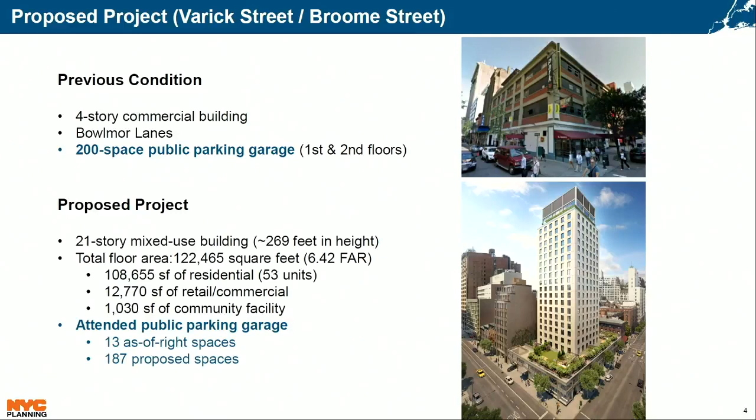As part of the project, the applicant also proposes to include an attended public parking garage of 187 spaces beyond the 13 as-of-right spaces permitted in the largely as-of-right development. The proposed parking garage would essentially replace the parking spaces in the garage that had previously occupied the site and serve the residents of the building as well as the surrounding neighborhood.

The proposed garage would include about 25,000 square feet of parking surface area on the subcellar and cellar levels. The parking spaces would be accessed from East 12th Street by a 2-way vehicular ramp located approximately 83 feet west of University Place. The shaded blue areas show the access ramp leading to the cellar level of the garage.

Shown here are the cellar and subcellar levels of the parking garage. The proposed garage will include 134 surface parking spaces, and 53 additional spaces on trays. Here's a rendering of the building base with the proposed parking garage entrance on the far left.

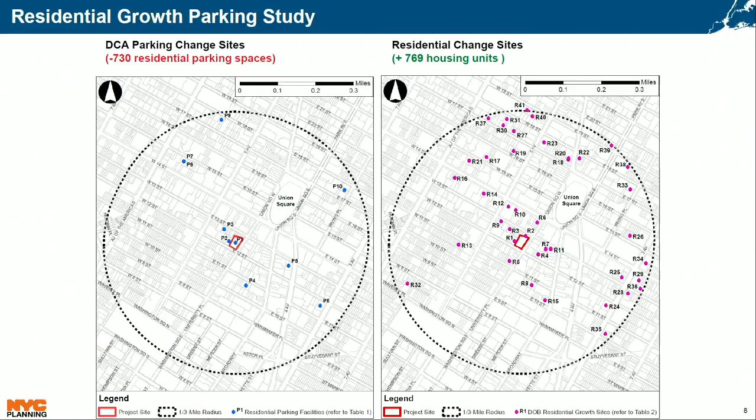The applicant undertook the residential growth parking analyses as required by the zoning regulations. As documented by the applicant, the area within a 1/3 mile radius of the project site has experienced significant residential growth and loss of parking spaces since 2006, which has generated an unmet parking demand. The required analyses found that the proposed 187 spaces are reasonable and not excessive in relation to the recent trends within close proximity to the project site.

Specifically, the analysis found that the ratio of change in residential parking spaces to change in residential units with the proposed action in the study area would be minus 64%, well below the residential growth parking ratio maximum of 20%.

At its full board meeting on December 21st, 2017, Manhattan Community Board 2 adopted a resolution recommending denial of the application. CB2 also recommends that should the City Planning Commission consider adding any additional spaces beyond the as-of-right number, the maximum number of spaces should not exceed 53, which is the number of dwelling units in the building, and require that these units be for residential customers only or for a combination of residential customers and car share spaces, as well as at least 38 permanent bike stations for monthly rental.

On January 24th, 2018, the Manhattan Borough President issued a recommendation to disapprove the application, as the Manhattan Borough President does not believe there is a parking demand in this part of Manhattan Core.

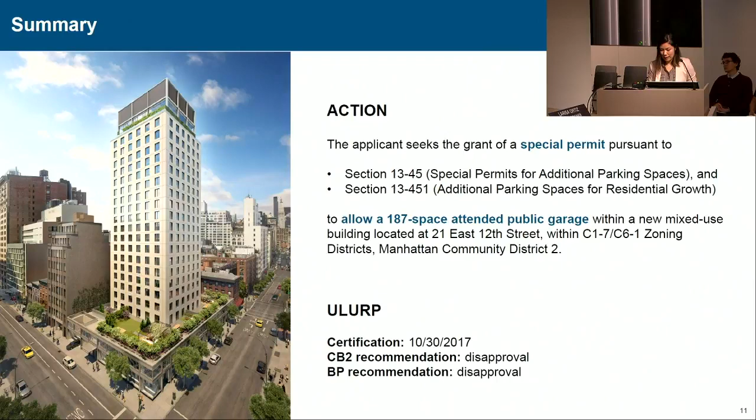In sum, the applicant seeks approval of a special permit pursuant to Manhattan Core parking regulations to replace a previously existing public parking garage within an otherwise as-of-right mixed-use development. Here are the findings of the special permit. This is the end of my presentation. I'm happy to answer any questions.

Questions from the commission? Commissioner de la Uz: Can you remind me how long the old parking garage has not existed at this point? The building was demolished in 2014, so.

And are there any traffic studies? I'm trying to go to the part about the special permit findings about traffic. I'm wondering if there are traffic studies from when that garage existed versus now when there is no garage, that could perhaps help inform number 3 around traffic congestion.

There is an environmental analysis done for the proposed action. I can look into it and provide some additional information. It just so happens that we have the exact same use for nearly the same number of spaces that existed at the spot, so. I think we should also ask the applicant to be prepared to address it at the public hearing.

The proposal has one entrance and exit on 12th, versus the former garage which had access on University and on 12th. So there was a lot going on in and out on both sides. This would limit the access to just 12th.

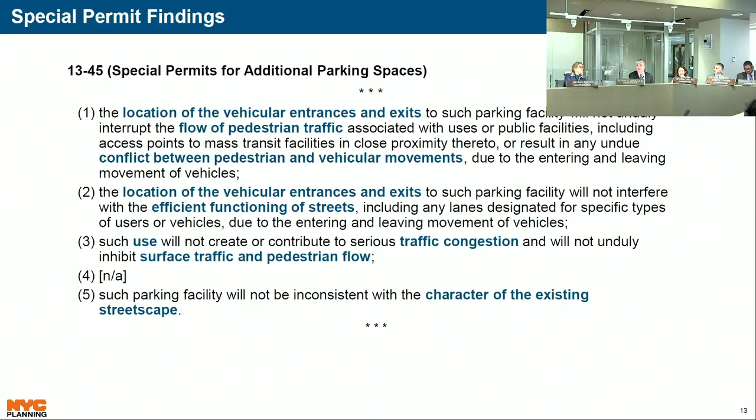I guess I would just add a little bit on the other side, literally and figuratively, on this issue, that we don't forget we are a major destination to the region, if not beyond, and not everyone comes to this city by public transportation. We market this city for people to come every possible way they can. This neighborhood particularly has some of the finest restaurants, some of the greatest shopping, and amazing businesses that bring people not just by public transportation.

I hope that balance gets achieved in the process. I realize we are confined by formula and findings, but we should be reasonable in recognizing how important this city is and how important the people who come, even not by public transportation, are to our economy, whether they're employees, business people, visitors, tourists, or consumers. So that's just my addition to the dialogue.

And I would note we consciously don't have sides of the table. We are going to continue this.

I take the ferry in now. But I recognize the significance, importance, and value of the people who come to the city expecting that the greatest city in the world is going to accommodate them in some way. The problem with cars driving around is that there's no place to park, so we can get people off the road faster and easier if there's actually some place to go, as opposed to them coming in thinking there will be some place to go and then searching around.

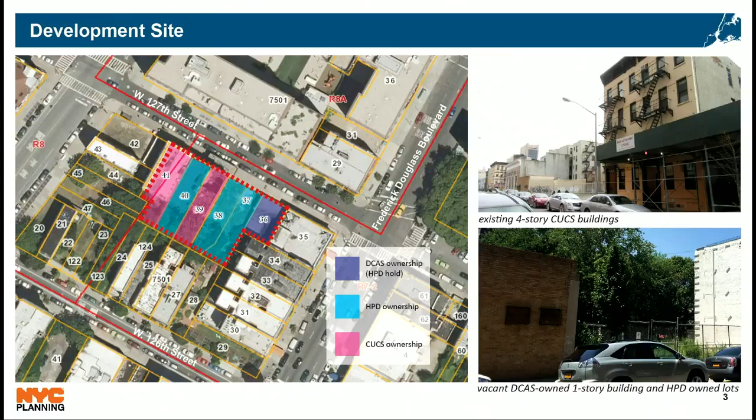Across West 127th from the development site is a 12-story residential building, and directly adjacent to the site on the east is a 1-story former bank building that's now used as a church. The larger surrounding area has a mix of residential, institutional, and commercial uses.

125th Street, which is a major commercial corridor and a cultural destination, is just to the south. The St. Nicholas houses, a large NYCHA campus, is to the north, as is St. Nicholas Park. And an entrance to the A, B, C, D 125th Street station is located just a few feet from the development site at the intersection of West 127th and St. Nicholas.

HPD proposes to convey the 4 city-owned parcels to CUCS, which would construct a 12-story building on the site. CUCS is a 35-year-old nonprofit that operates 15 supportive housing and 3 transitional housing developments in New York City, with 7 of these facilities located in northern Manhattan. CUCS was a pioneer of the supportive housing model, and it's also the Northern Manhattan Street Outreach Coordinator for the Department of Homeless Services.

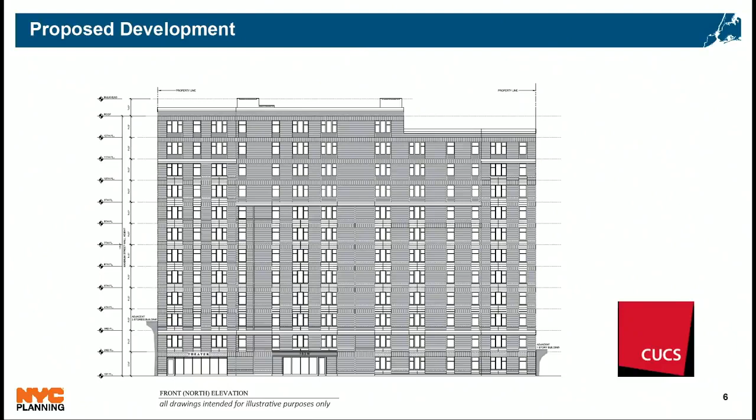The proposed development would include 117 units in total and would be manned 24/7 by skilled professionals. On-site social services would be available solely for residents of the building, but no distinction would be made between residents of the affordable and the supportive units. Additional amenities would include a fitness room, laundry facility, lounge, community room, and rooftop garden.

The building would rise to approximately 119 feet, not including bulkhead, and it would adhere to required front and rear setbacks. The cellar would contain social service offices and amenities. The first floor would contain residences, offices, and amenities, and floors 2 through 12 would be entirely residential.

So the overall zoning floor area of the building would be approximately 97,000 square feet with a floor area ratio of 6.5. 6.5 is the allowable FAR for most community facility types, but this is a nonprofit institution with sleeping accommodation, and as such, it's subject to a lower FAR of 3.44 in R7-2 and 6.02 in R8. So therefore, the applicant is requesting a special permit to apply an FAR of up to 6.5 to a nonprofit institution with sleeping accommodations at this site.

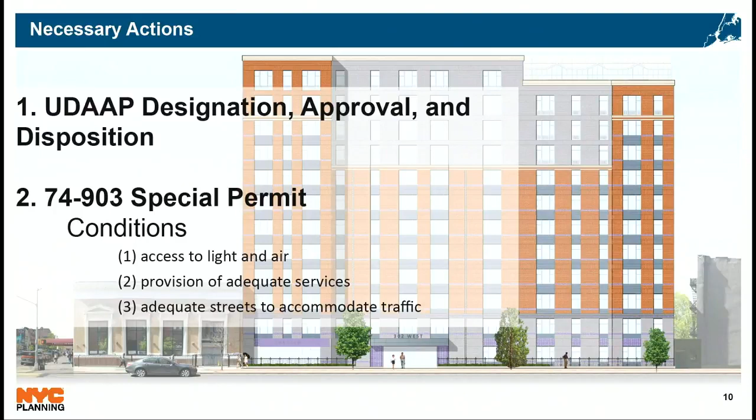The special permit is subject to conditions regarding access to light and air, provision of adequate services, and traffic impacts. And in addition to the special permit, the applicant is seeking a UDAAP designation, approval, and disposition of city-owned property.

Manhattan Community Board 10 voted 14-7 to recommend approval of the application with conditions. The conditions were that CUCS reach out to neighboring residents and businesses, and that the affordable units de-emphasize credit history when considering applications. The board further recommended that HPD strive to offer the units at a lower AMI of 30%.

The Manhattan Borough President recommended approval of the application, and the full text of both recommendations is in your packages. So approval of the applications would help facilitate the construction of a 12-story building with a mix of supportive and affordable housing and a range of attendant social services. I'll take any questions now.

Thank you, Joseph. Questions? I was disappointed. I would hate to disappoint. It'd be great just to find out what the unit mix is tomorrow.

Sure, I had a slide on the unit mix, although I didn't read it out, but it's about 46 units are at 60% AMI. Studios, 1s, 2s... the applicant can speak to that, that would be helpful. And I'm assuming that a number of the units for formerly homeless individuals are actually for individuals at 30% of AMI or even below. That would be helpful. I think that pretty much addresses the community board's concern, but maybe if they can just be explicit about that, that'd be helpful.

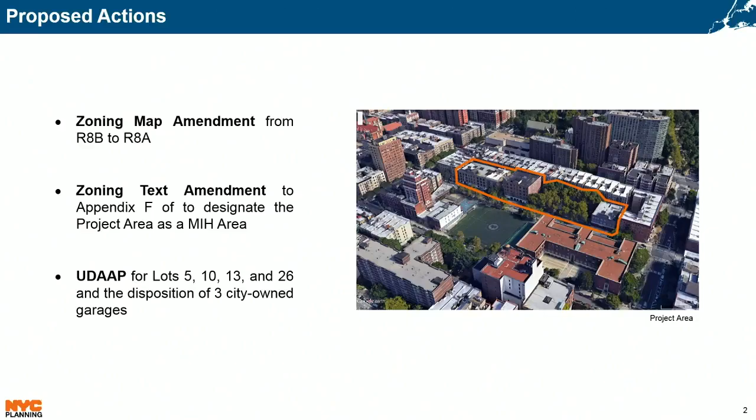The development site is in orange, and across from it is the Booker T. Washington Middle School and Playground on West 108th Street. Morningside Park and the Cathedral of St. John the Divine are 2 blocks north, and the surrounding area is well served by public transit with the 1 subway line on Broadway and 110th, and the B and C lines on Central Park West and 110th, as well as several bus routes.

The project area includes Block 1863, lots 5, 10, 13, and 26. It's bounded by Amsterdam to the west, Columbus to the east, and West 108th to the south, and it's currently part of a larger R8B zoning district. It has a total lot area of about 60,000 square feet. The disposition under the UDAAP involves lots 5, 13, and 26, which are HPD-owned public parking garages with a total of 675 spaces.

Lot 5 is a 4-story garage with 250 spaces. Lot 13 is a 5-story garage with 300 spaces. And Lot 26 is a 3-story garage with 125 spaces. All 3 garages within the project area are active pursuant to month-to-month lease agreements between the garage operators and the city.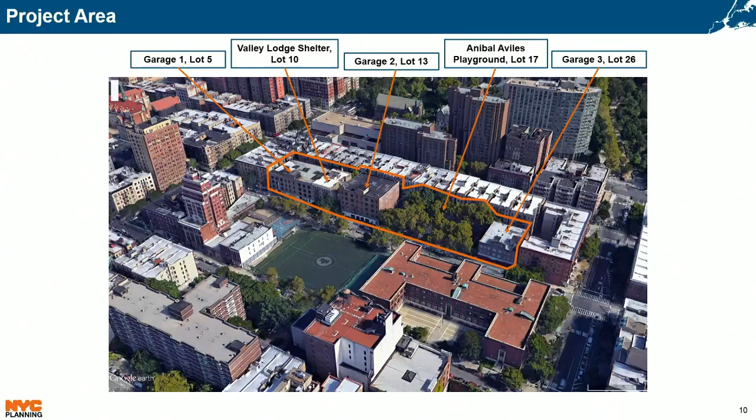So lots 5, 10, 13, and 26 constitute the development site as a result of the proposed actions. Lots 5, 10, and 13 make up the site of proposed Building 1, the western building, and Lot 26 is a site for proposed Building 2, the eastern building. These buildings would replace the existing garages and Valley Lodge shelter.

The project area being rezoned is outlined with the dotted lines. So the proposed R8A rezoning would allow the applicant to build their proposed buildings at 5.3 FAR with total heights between 110 to 115 feet. The bulk of development for this project will be limited by HPD through restrictions in the land disposition agreement to 5.3 FAR for both buildings. The primary reason for this limit was based on early discussions with the community and keeping the site within context.

The proposed project would consist of two buildings. Both the western building and the eastern building have frontage on the northern side of West 108th Street. The development is designed to provide approximately 277 units total of affordable and supportive housing, along with shelter facilities. The western building, planned for construction shortly after disposition, would contain 194 affordable housing units. Additionally, the development would upgrade the Valley Lodge shelter from 92 beds to 110 beds, with added community events and dining spaces on the ground floor and an office suite for WSFSSH support services. WSFSSH has acquired a site on the Upper West Side to temporarily house the Valley Lodge shelter during construction.

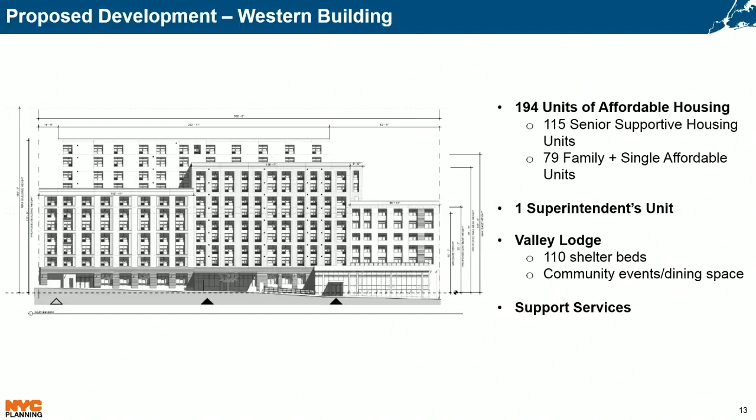The eastern building would not be constructed until 5 years after construction begins on the western building and would provide a maximum of 81 units of senior supportive housing. The building would have a floor area of around 40,000 square feet. The street wall would be at the street line with a 26-foot setback and a total of 11 stories at around 110 feet. There was a previous question about the reason for the 5-year phasing.

It would minimize disruption by extending the development timeline into 2 phases, as the EIS shows potentially greater impacts if both sites were under construction together. And the neighborhood would retain 125 parking spaces for those 5 years to ease the transition away from parking.

As the lead agency for the environmental review, HPD released a notice of completion for the draft environmental impact statement on October 13th. The draft EIS identified a potential significant adverse impact for noise from construction associated with the proposed project. The potential for mitigation measures is being explored between the draft EIS and the final EIS.

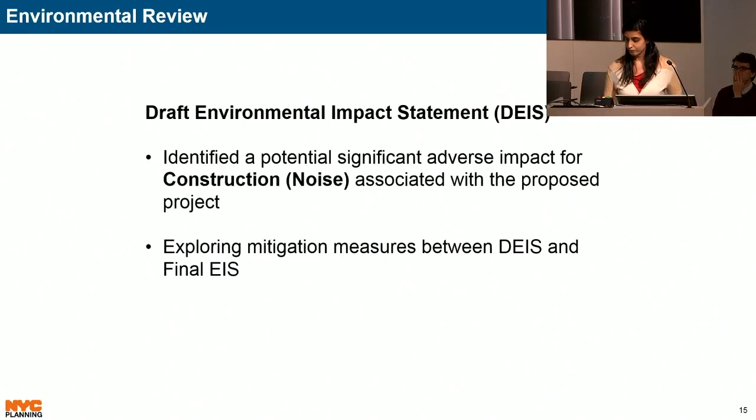Based on the proposed development, the actions include a zoning map amendment to change a portion of the project area from R8B to R8A, since under the current R8B zoning, residential and community facility uses are capped at 4.0 FAR. A zoning text amendment to Appendix F to map a MIH area for option 2, and the approval of a UDAP and disposition of city-owned property.

In response to a previous question regarding mapping MIH, in order to ensure that MIH is applied consistently, decisions about its applicability are generally made on the basis of changes in residential FAR permitted by the underlying zoning, rather than based on other mechanisms that could limit bulk regulations. So in this case, it's appropriate to make the MIH applicability on the underlying zoning rather than restrictions in the land disposition agreement, since future modifications to that agreement will not be reviewed by the Commission.

On December 5th, CB7 voted unanimously in favor for the proposal with 4 abstentions. The board conditioned their approval upon the execution and binding effectiveness of appropriate documents reflecting the proposed plan, the establishment of a community advisory group to coordinate construction issues, and the provision of a safe construction site and selection from a diverse local community hiring pool for construction workers and eventual support staff. CB7 also urged HPD to expedite the transfer of the eastern development to WSFSSH prior to the proposed 5-year phasing.

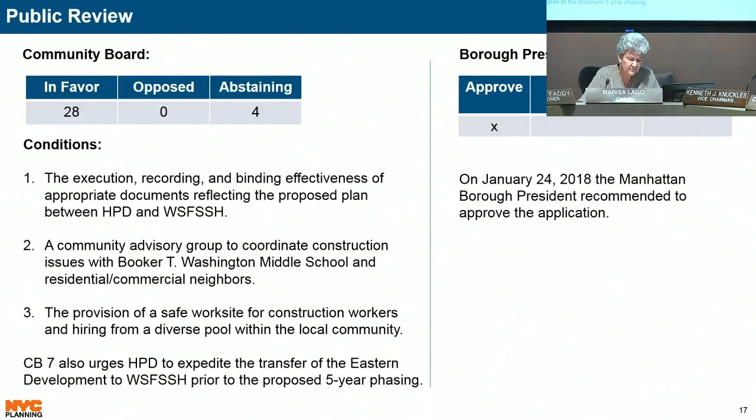I would just hope that the architect, since you mentioned somebody from the design team would be coming to talk, could just explain, since it's really unclear from the photos and renderings, the condition between the park and the building, whether or not there are any residential units on the ground floor, and how they interact, because it looks as if they're smack up next to each other. Right now it's a garage, so it doesn't seem that relevant, but when it's a residential building, it seems like that would be an important question.

Sure. What I can say to that is the ground floor of the western building will be sort of event and dining spaces as well as offices. So the residential units will begin above that. But the design team will be able to discuss in more detail.

Other questions or comments? Commissioner de la Uz. It'd be great Wednesday if they could just give a breakdown of the studios to multiple bedrooms. That'd be great. Sure, thanks.

Others? Okay, so this is now ready to go to the public hearing on Wednesday. Thank you.

Item 13 on the agenda, page 471, is a pre-hearing review for a notice of intent to acquire office space in Manhattan Community District 1. Giving her first presentation before the commission is Allison Brown of the Manhattan office. Thank you. Good afternoon, commissioners.

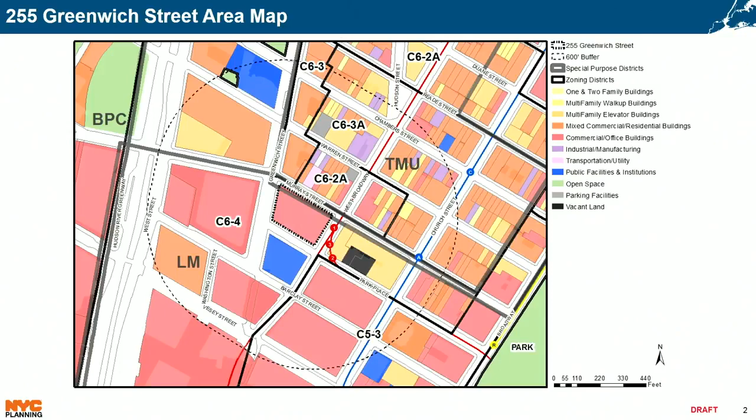The site is located in a C6-4 zoning district in the Special Lower Manhattan District. Surrounding land uses generally comprise commercial offices, retail, community facilities, and residential uses. The immediate area is well served by public transit, with access to several bus lines, the 1, 2, 3, A, C, E, and R, W subway lines, PATH trains, and several ferry services to New Jersey, all within walking distance.

The Campaign Finance Board currently occupies 20,000 square feet of office space on the 12th floor of 100 Church Street, shown here in blue. The Campaign Finance Board is an independent city agency made up of a board of 5 members and 125 staff. The CFB publishes public information about money raised and spent in city elections by candidates and independent spenders. The agency engages and informs voters through community outreach and advocates for legislative changes to registration and voting processes.

On a weekly basis, the CFB welcomes over 40 visitors to its office, including members of the general public, members of the press, representative campaigns, and elected officials. The applicant states that the size and layout of the office area and training rooms at 100 Church Street are insufficient in allowing the CFB to perform effectively and efficiently in their daily functions. The insufficient space of training rooms and the ineffective operations of heating and cooling systems have caused added costs to the agency. DCAS is requesting the acquisition of approximately 50,000 square feet of the entire 4th floor of 255 Greenwich Street, shown here in red.

The space will provide for the relocation of the entire Campaign Finance Board staff. The CFB's proposed relocation allows the agency to remain easily publicly accessible to multiple forms of public transit, as well as in close proximity to City Hall, the City Council offices, and the New York City Board of Elections.

The proposed office space at 255 Greenwich Street includes sufficient workspace for all staff, as well as large public meeting rooms, a large training room, and individual consultation rooms. The agency will predominantly utilize the proposed space during normal business hours, but there will also be work after hours and on weekends. During election years, there is an expected increase in off-peak work hours by staff and visitor traffic to the site.

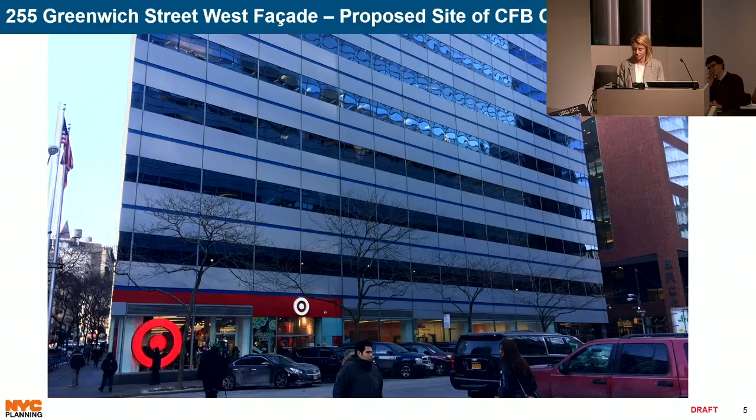Other questions? I was actually struck by the fact that the community board resolution was that they don't oppose. And was that, should we read something into that? I don't know. Is that how they write them? This is the first one I've seen, so. We'll go to a public hearing on Wednesday. Great, thank you.

Item number 14 on the agenda, page 480, is a pre-hearing review for a zoning map amendment in Brooklyn Community District 8. Jonah Rogoff of the Brooklyn office is here to present.

Good afternoon. This is an application that was certified on October 30th, 2017 and is returning for pre-hearing. The applicant, Silver Shore Properties 78 LLC, proposes a zoning map amendment to change an R6B district to an R6A/C2-4 district in order to convert part of an underutilized ground floor parking area within an existing building to commercial use, and also bring an adjacent commercial use into conformance with zoning.

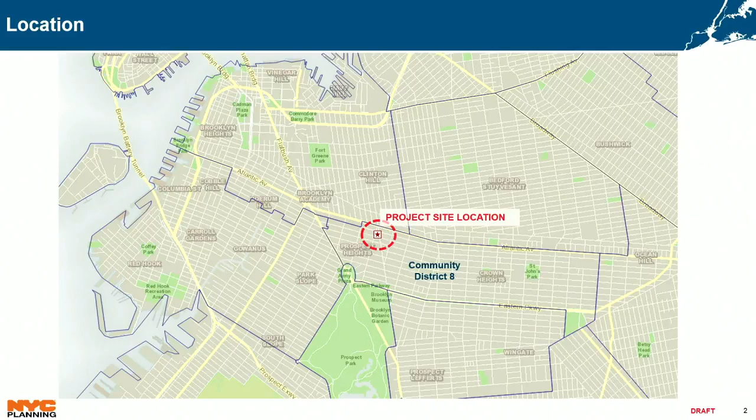I'll just quickly go through an abbreviated version of the project. The project site is located within the Prospect Heights neighborhood of Brooklyn Community District 8. The surrounding area is predominantly residential with mixed-use buildings located primarily along Washington Avenue, which serves as a commercial corridor. In 1994, an area-wide study of Prospect Heights contextually rezoned much of the area and mapped the subject block with an R6A C2-4 district and an R6B district beyond 100 feet of Washington Avenue.

The area is very well served by public transit. It's located less than a quarter of a mile from the C subway line, and there are multiple bus routes within a short distance. The project area is bounded by Dean Street to the south, Pacific Street to the north, Underhill Avenue to the west, and Washington Avenue to the east. The boundaries would essentially extend an R6A C2-4 district over the R6B portion of the block.

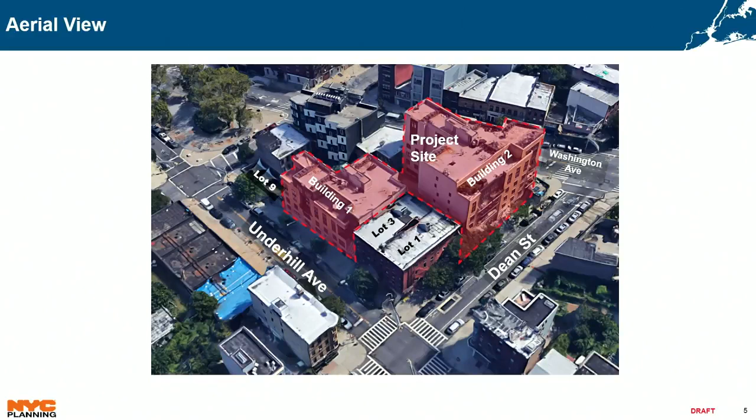The project site includes two residential condominium buildings, which have a total of 39 dwelling units and a combined FAR of 2.75. The project area also includes two lots with an existing residential building located here and a mixed-use building here with ground floor retail, both of which have FARs above what's permitted in the current and proposed rezoning.

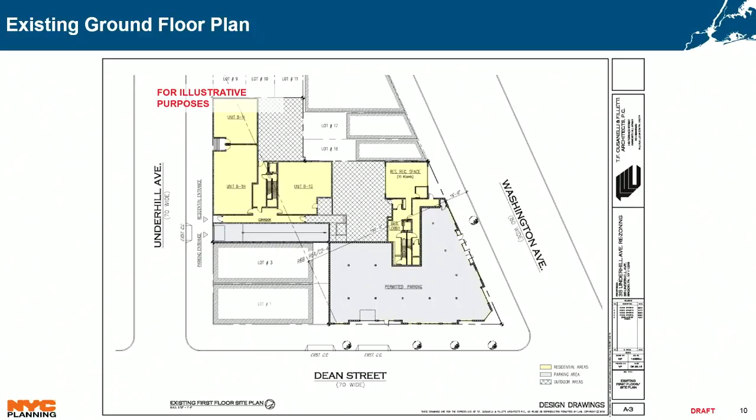The existing floor plan shows this ground floor parking area, which is permitted but not required parking. At the request of the building's condo association, the applicant seeks to convert a large portion of the parking area to commercial use in order to activate the streetscape and more fully utilize the space.

To facilitate the proposed conversion, the applicant seeks a zoning map amendment to extend an R6A C2-4 district over the entire block, which would effectively generate floor area that could be used to convert the ground floor to commercial. The action would also bring an existing commercial space on an adjacent lot into conformance with zoning.

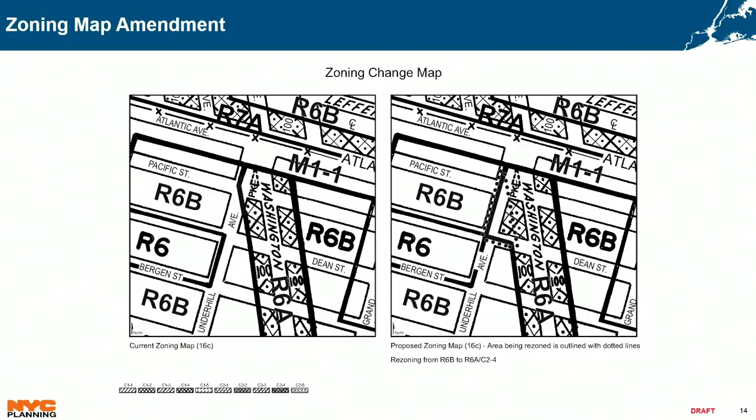During public review, Community Board 8 voted 16 in favor, 8 opposed, and no abstentions to approve the application with no conditions. Borough President Eric Adams voted to approve the application with 2 conditions: first, that the applicant demonstrate an effort to purchase additional development rights that would enable the entire conversion of the existing ground floor accessory garage to commercial or community facility use in a space that fully qualifies as zoning floor area; and second, that the applicant reach out to supermarket operators of smaller establishments that feature affordable, healthy foods.

Just two quick follow-ups to questions at certification. First, the floor to ceiling height along the commercial portion is roughly 10 feet. The applicants will be able to elaborate on that further. It's partially below grade, so it appears shorter from the rendering. There's also a small slope along Washington Avenue, and they can elaborate further on that.

Second, the two buildings within the project area on the corner of Dean Street and Underhill do contain rent stabilized units according to the online database available by the state. However, the proposed zoning change would not result in any development potential on these sites since the buildings are currently overbuilt and will remain overbuilt with the proposed action. That concludes my presentation. Happy to take any questions.

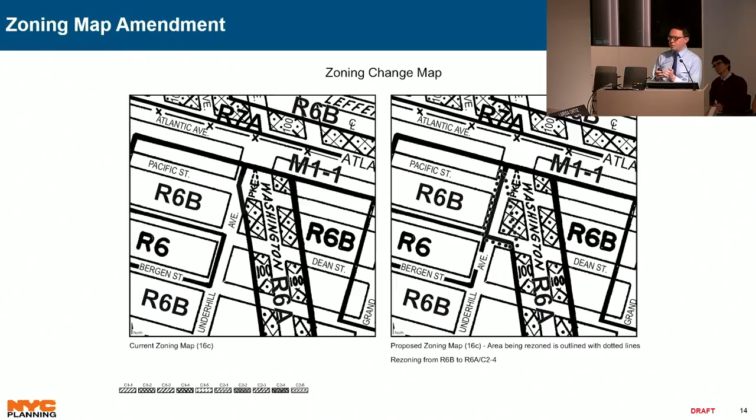So we actually worked very closely with Council's office. This was a fundamental question when we were processing the application. One of the major factors was just the overall size of the rezoning area. I believe it's about—I can confirm—but it's just that sliver, it's not the whole small building site. I'll go to the tax map. And then also the development potential...

...would be very small. I don't want to speak for, I think it's a larger question, but generally our criteria is that if it wouldn't result in a potential for at least 10 or more residential units or 12,500 square feet, so because the overall potential from both the development site and the other sites wouldn't result in that, we didn't feel that it was appropriate to map MIH. Another consideration was just the overall character of Prospect Heights, and we wanted to be cognizant of a rezoning that also matches what we've heard in the community.

I want to thank Commissioner Levin for her question, because we do always look for any opportunity to map MIH when it's appropriate and meets the criteria. I knew you had to have a good reason here, you wouldn't have let this one just slide by. But Jonah's answer and also Nabila's makes me realize, if the agency has a methodology, a factor sheet, or rules of the game that are written down, I think it would be helpful for the commission to also know what the criteria are, what are the things you check off your list as you try to decide whether an MIH mapping is appropriate. Perhaps at a future review session, when we don't have as many items on the agenda, it might be useful to have a presentation on that. Thank you.

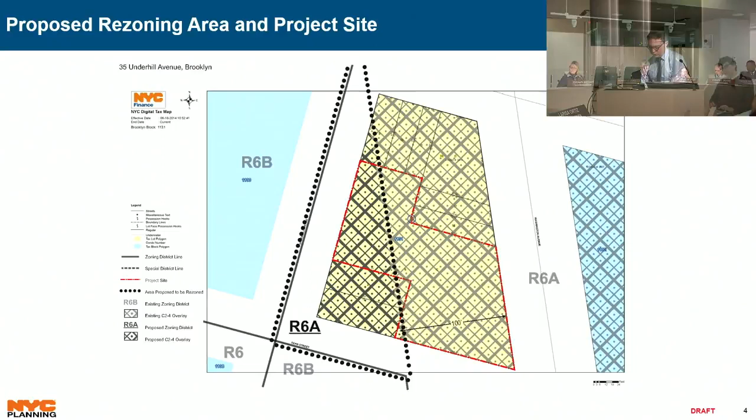Are we expecting representatives from the community board at the hearing on Wednesday? Do you know? Not to my knowledge, just the applicant and the representative of the condo association. It might be helpful. We can certainly make the request.

Any other questions? Okay, so this is the final item on our agenda today that will be sent to a public hearing on Wednesday. Item 15 on our agenda is a council modification for 587 and 597 Bergen Street rezoning. The council proposes to remove the MIH option 2 from the application, leaving only MIH option 1. Jonah is present if there are any questions.

And Ryan, would you want to explain how we propose to deal with these? I've discussed with some of the other commissioners prior to the review session, but where we have a council modification that is simply tinkering with the MIH options, we think it's most appropriate to send a memo to the commission prior to the review session, and then we will just schedule it for a decision. If there are any questions, then we would be glad to have the members of the team present. But what we realized was that we frequently will have members from our borough offices seated here just for this item, and then there aren't questions because the modification is so straightforward. So with that, I'll ask for an assent by show of hands to send a letter to the City Council saying that the proposed modification is within scope. Okay, approved. Thank you.